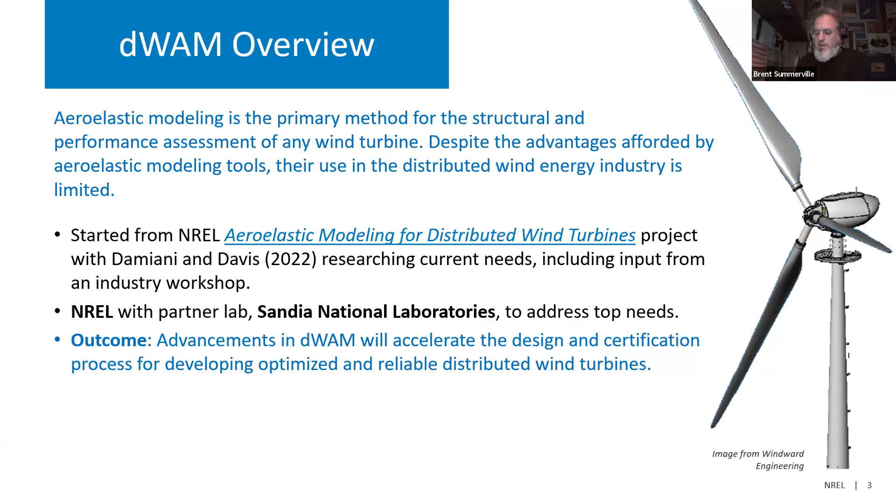So distributed wind is wind turbines of any size in a distributed on-site application, but we found out that the modeling tools such as OpenFAST were really well suited for large turbine archetypes, 3-blade, upwind, pitch regulated, but some of the distributed wind archetypes in the small and medium scale were kind of left behind, and some of the capabilities had disappeared as OpenFAST and other tools have evolved.

So the top archetypes that we looked at in distributed wind were upwind stall controlled with active yaw, upwind stall controlled with passive yaw with or without a tail, and then downwind stall controlled passive yaw, and then VAWTs, looking at the Darrieus and the straight blade H-VAWT archetypes. So we focused on those dominant archetypes and looked at the tools to see what was needed to model

these turbines. So the tools needed improvement, improved physics for these archetypes, including passive yaw and tail vane control, and of course VAWTs have had modeling needs for quite a while. So it's really great to have some support to turn the team of modeling experts' attention toward these distributed wind archetypes for a period of time here to sort of do a little catch up on the tools.

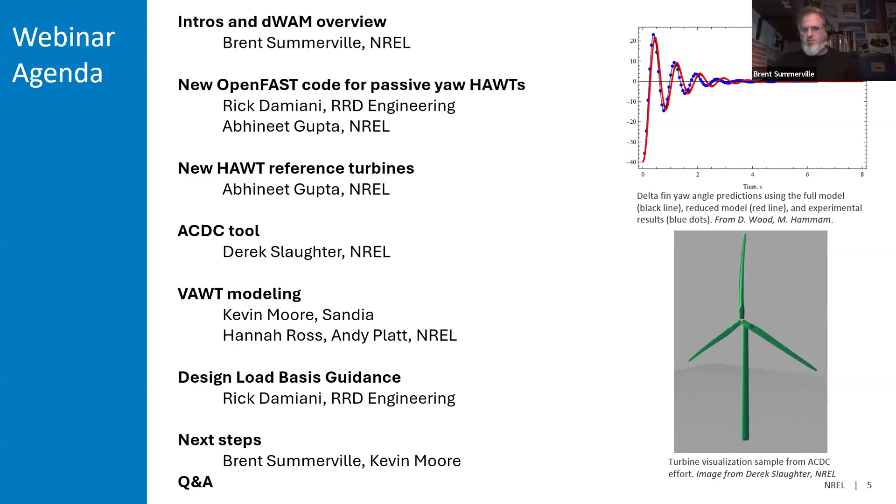Can you guys see the screen? Yeah, it looks good, Rick. Okay, great.

So I just want to remind folks that this work was also authored by Kevin Fletcher, who is a graduate student at the University of Virginia, and he is finishing up his PhD and will probably join us again at the Floating Wind Technology Company, which is this company that we have with Dean and Max and a few other junior engineers that work on a number of different things, including distributed wind.

Just a few words about the motivation of this study on the yaw friction. This is the table of contents of the presentation. We'll go pretty quick through it. We'll talk about the motivation. I will give a summary of the theory, and then maybe some snapshots of canonical cases for verification, including a case for a downwind turbine, and some conclusions, potential work to come.

I guess I probably should start the video so you can see me as well.

So the motivation, just like Brent summarized earlier, we carried out a study in the years 2021 and 2022 that was looking at aeroelastic modeling needs for distributed-scale wind turbines, and the yaw friction modeling was part of the top 10. In fact, it was in the top 5, as you can see here. This is the result of an investigation that we carried out across numerous stakeholders, and that report goes into more details about that.

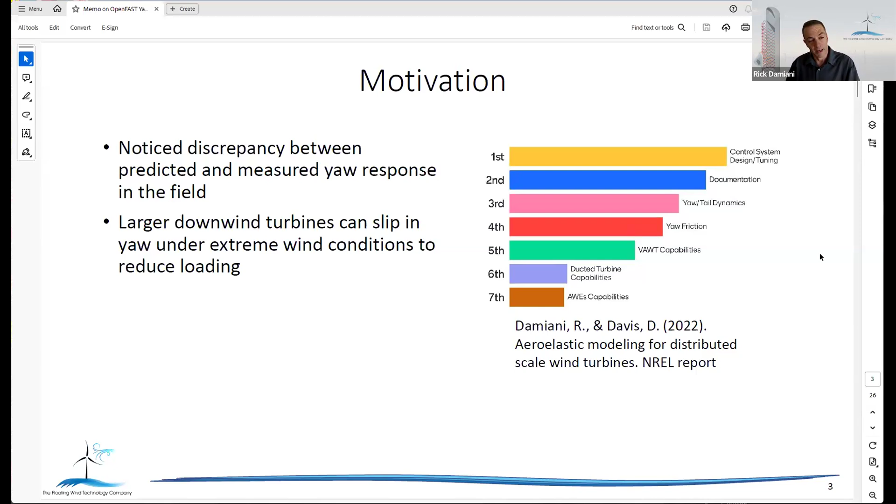Also, while I was at NREL and I was designing a rotor for Hitachi, which is a downwind turbine, at the time we were looking at a 10 megawatt rotor. And one of the features that this turbine had was the capability of slipping in yaw under extreme wind conditions. It was a feature, but in other machines, obviously, that can happen unplanned. So having a good model for yaw friction could be certainly useful to understand the dynamics and the loads on different kinds of machines, not just distributed wind turbines.

So just a few words about the theory. We implemented a basic Coulomb friction and an expansion of that theory for the inclusion of viscous friction. So in the Coulomb friction, as you may very well know, we usually refer to static and dynamic friction, and the Coulomb theory assumes 2 different values for the friction coefficients, and therefore we have different thresholds to use in case the joint is actually static or is moving, so it's in a dynamic situation.

And the viscous friction adds a dependency on the speed. It can be linear, but it can also be more complicated. So quadratic, for example, to simulate more complicated joints, not just sliding surfaces, but potentially also roller bearings. So what you see here are just the equations. I'm not going to go into these details, but this is just to give you an idea of what went into the code in OpenFAST.

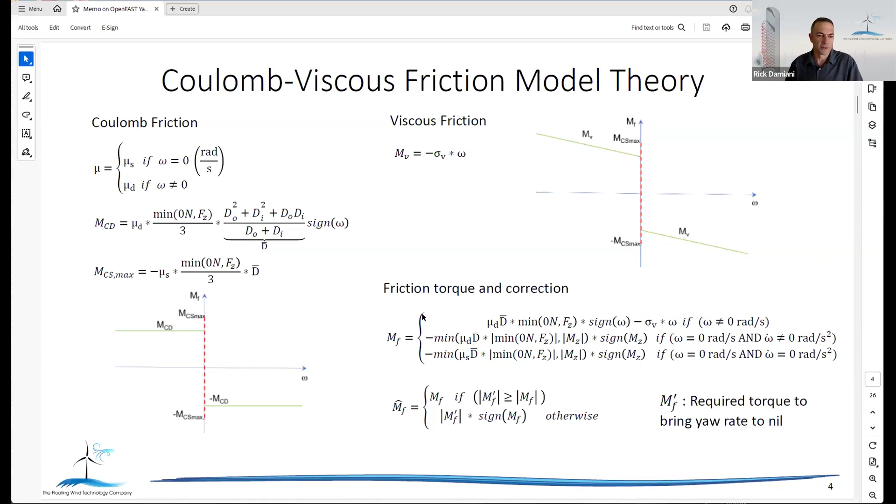We changed the ElastoDyn module of OpenFAST to include this model for yaw friction, and we also changed the input file to ElastoDyn to account for the various modalities that we can use for the modeling of yaw friction. And so you can see here the main parameters that can be introduced into the code.

The first one is a flag that allows the user to select whether or not the yaw friction is enabled and whether or not you want to use your own parameters in terms of maximum Coulomb friction torque, for example, and dynamic friction moment at null yaw rate, or if you want the code to estimate what those values should be given a certain static and dynamic coefficient. So in that case, the code would also account for the effect of the normal or axial loading on the RNA. And then, of course, there's a viscous friction coefficient that you can also use.

I just want to highlight that by changing that initial flag, again, you can select which model or submodel you're going to use, and you can also augment the entire yaw friction modeling with your own user-defined model.

Like I said, a few snapshots about the canonical cases. We started with a very simple case. We looked at an AOC wind turbine, which is a free-yawing downwind turbine, for which we have an aeroelastic model available. And it's an older machine. It's not used anymore, but it's a 50 kilowatt machine that has, again, an aeroelastic model publicly available. You can see that it has a 15-meter rotor diameter, and generally speaking, it was mounted on a hub height of 25 meters.

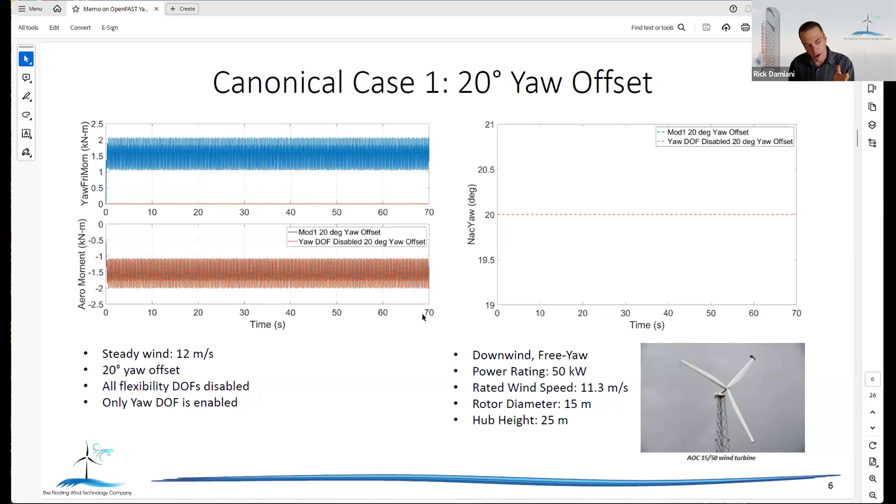So we did that by first disabling actually the yaw degree of freedom, calculating the aerodynamic torque on the RNA, and then allowing the yaw degree of freedom free, such that we could then verify that indeed the yaw friction was exactly opposite to the forcing.

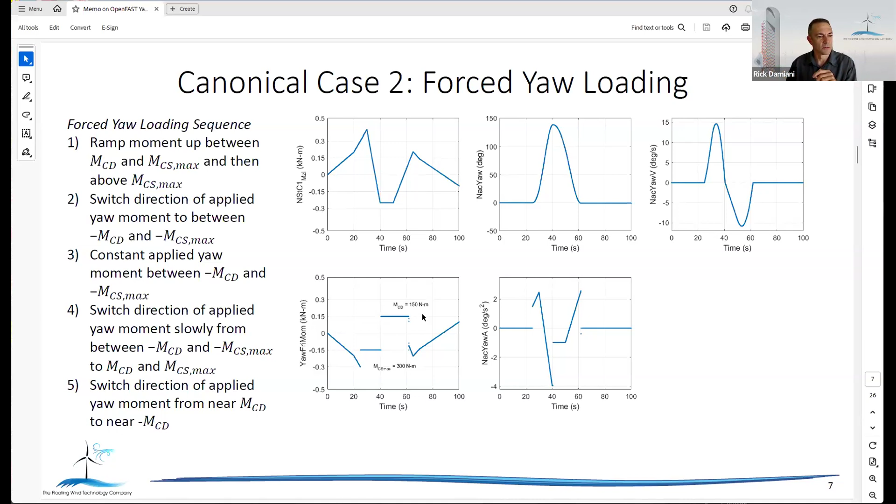Then we went a little bit more into more complicated cases. In this particular case, as illustrated here, we just drove the torque on the RNA to tower joint, so at the yaw bearing, with a prescribed law, and that allowed us also to verify that certain behavior was happening when we would cross those thresholds, again, of static and dynamic friction in particular. And everything turned out to be what we expected after a few iterations and a few bugs that we had to fix.

Here's another case where we had a simple decay. We introduced a yaw spring in the machine, and we preloaded it with a certain yaw angle, and then we would expect the yaw to go back to zero or close to zero, depending on how much friction we input. And we verified that with the chosen, again, friction parameters, we would get as a steady state value for the yaw exactly what we would expect for the balance of that torque spring that we introduced.

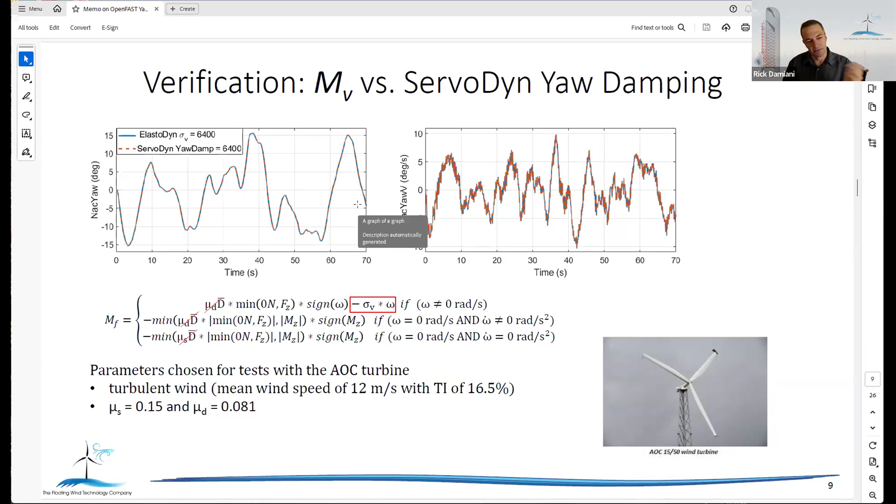And then we also looked at the verification against ServoDyn, where yaw damping can be inserted somewhat separately from this module. Obviously, this module can take care of linear damping, as I described before. So we wanted to verify that indeed using ServoDyn and the yaw damping in there, or our yaw module in ElastoDyn would return the same response. And you can see basically these curves here showing the yaw as a function of time, that for these, the curves are basically coincident.

So concluding, we implemented a yaw friction that can obviously be further expanded. It's already versatile enough where you can introduce your own formulas if you have, say, formulas from a ball bearing or roller bearing manufacturer. You can try and introduce those laws in there if they are at least describable with equations that are similar to what we already have, or you can introduce your own module within the user-defined function. So this preliminary verification has been completed. We obviously would like to do some more validation against some field data.

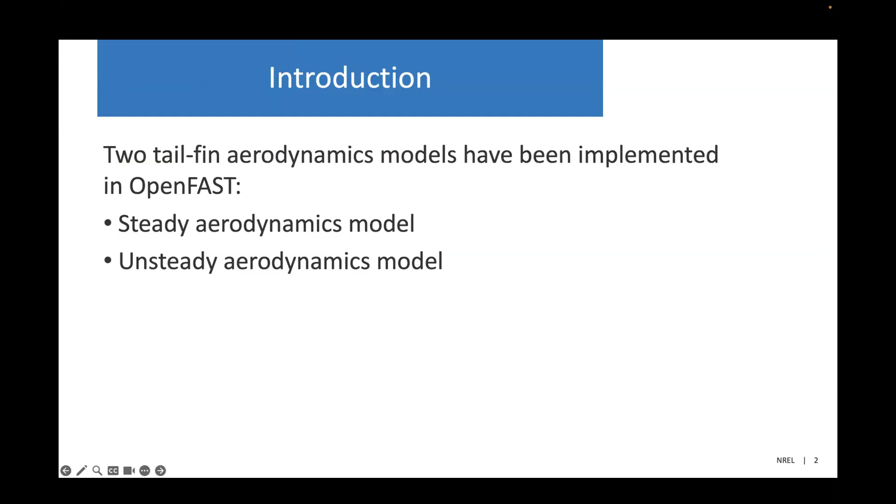The first one is a steady aerodynamics model, and the second is an unsteady aerodynamics model. The steady model is from the legacy FAST v7, but it was not available in OpenFAST, and distributed wind turbines needed a tail fin model. The steady model is very helpful in rapid prototyping, design and analysis, and stuff like that.

Now, the steady tail fin model is a simple polar-based tail fin model. It utilizes the airfoil polars lookup table, and it provides users the capability to implement the tail fin as a simple airfoil. Users can provide the lift, drag, and moment coefficients, and OpenFAST can calculate the tail fin forces and moments and the entire effect of tail fin aerodynamics on yaw.

This simple model can be implemented as a separate tail fin aerodynamics input file. In this implementation, you can select between no tail fin model, a polar-based model, which is what I'm talking about right now, and the unsteady model, which is the next half of this presentation. Then the user needs to define the tail fin chord, the area, and the undeflected position of the tail fin, basically the arm length in X, Y, and Z direction.

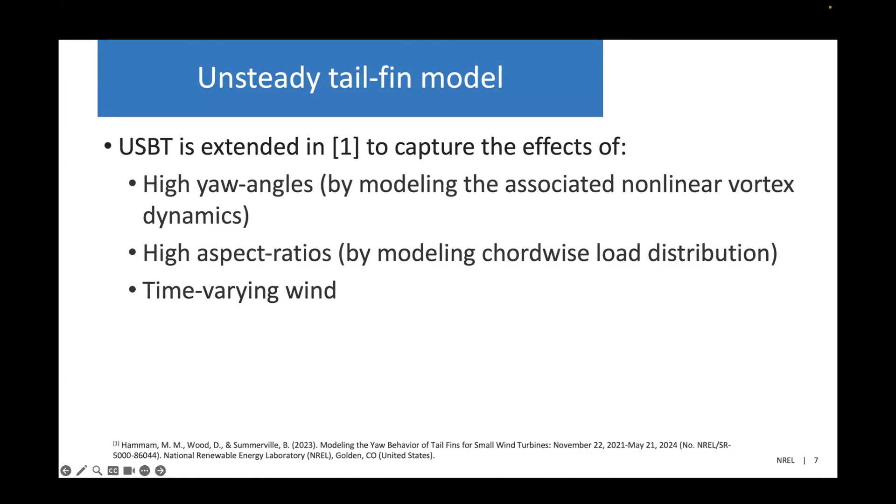So the first term, KP, captures the effect of potential flow on the tail fin. The second term, which includes KV, captures the effect of vortices, so the effect of vortices on the tail fin force. And the last term captures the effect of the drag. So all of these terms are taken into account.

And as you can see, all of these are multiplied by something called a separation function, x1, x2, and x3. These three functions sort of tell OpenFast the relative contribution from the three terms. So x1, x2, and x3 act like weights for the potential flow source of the tail fin force, the vortex source of the tail fin force, and the drag source of the tail fin force.

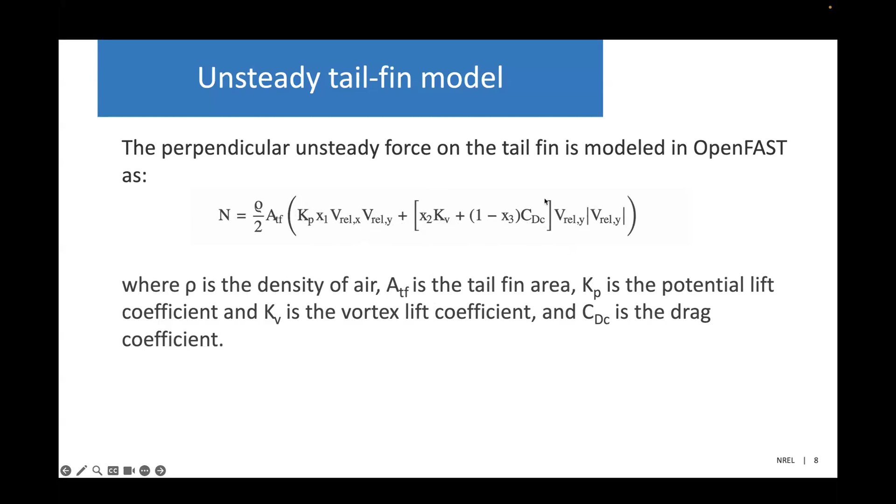Now, these separation functions are usually a time-varying phenomena, but Hammam and Wood conducted some studies and found out that a quasi-steady approximation of the separation function is also quite good. So in OpenFast, a quasi-steady approximation of the separation functions is implemented. And I'll just go into a little bit of detail of how these separation functions act.

So this parameter alpha star tells us the value of the angle of attack above or below which the potential flow or the vortex flow or drag coefficients become important or not. So that's one parameter that we need to find out. And the other one is sigma, and sigma characterizes the slope of this function.

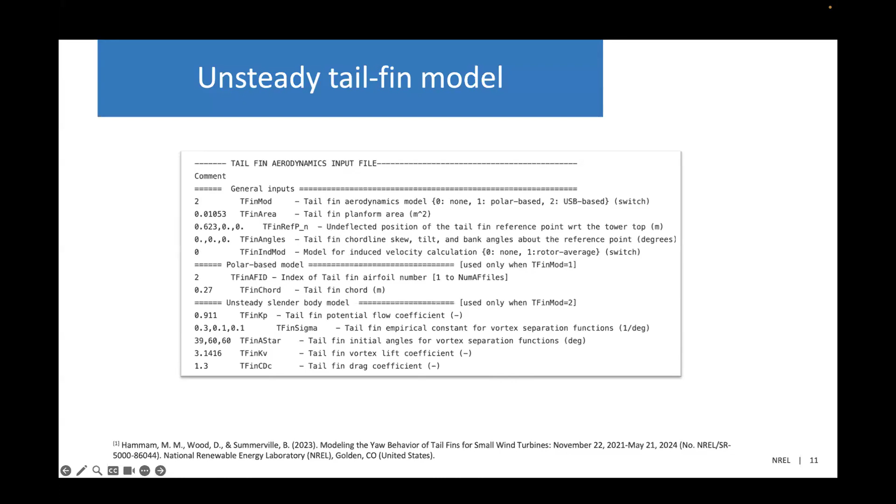And the rest of the data is pretty simple: the tail fin area, the tail fin positions and angles, and stuff like that. This model has been implemented and tested experimentally as well, and that's a separate publication that we have. All the credit for developing this theory goes to Hammam and Wood. And we have this implementation that has been tested. So I think this is very useful if the user needs to implement something that is higher fidelity compared to a simple polar based approach. Yep, that's it.

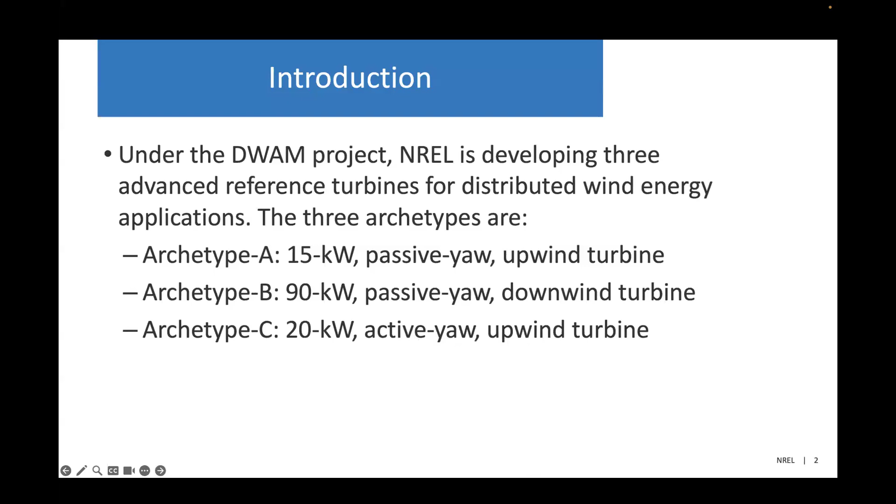So the three archetypes that are being developed under DWAM are a 15 kilowatt passive yaw upwind turbine, a 90 kilowatt passive yaw downwind turbine, and a 20 kilowatt active yaw upwind turbine. And these three turbines are based on existing industry standard turbines. So archetype A, the passive yaw upwind turbine, is based on the Bergey Excel-15 wind turbine, while the passive yaw downwind turbine is based on the Eocycle turbine, while the active yaw upwind turbine is based on the QED Phoenix 20 turbine.

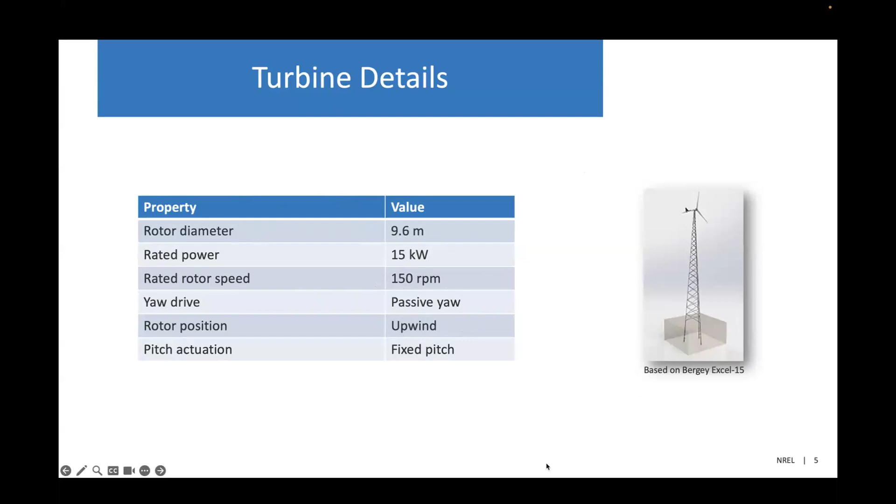So I'm going to first talk about the NREL 15 kilowatt turbine. There's a lot of information here, so I'm going to go a little bit faster to only talk about things that are of interest to this audience. This turbine has a 9.6 meter rotor diameter, a rated power of 15 kilowatt and a rated rotor speed of 150 RPM. As I said, this turbine is passive yaw and upwind. And all these turbines do not have a pitch actuator, so they are all fixed pitch turbines.

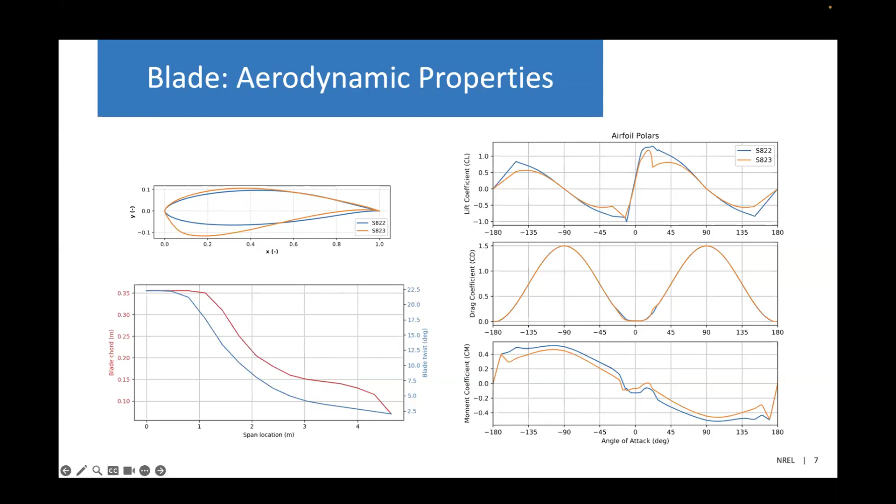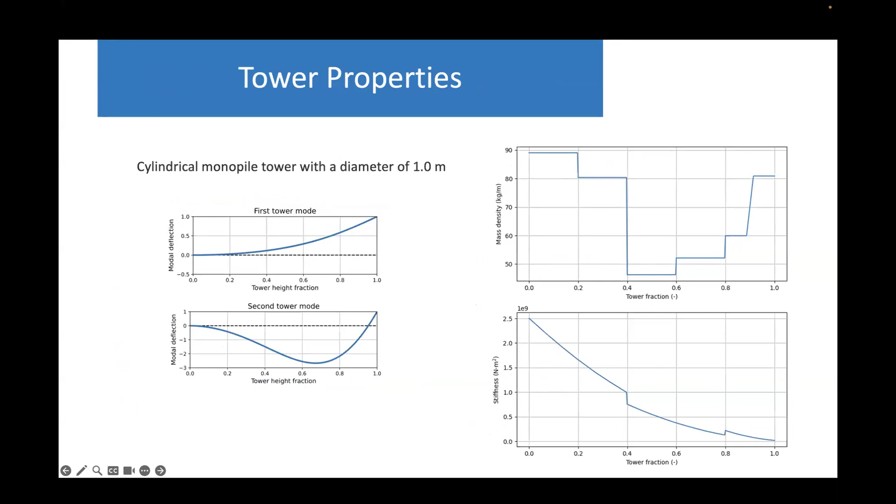Here are the properties of the hub and the nacelle. Again, this is a direct drive turbine, so it has a gearbox ratio of 1. And the other parameters are provided. Again, this is a full aeroelastic model, so it's similar to how the NREL 5 megawatt model was presented. The details of everything can be found using the OpenFAST files that are provided with this model.

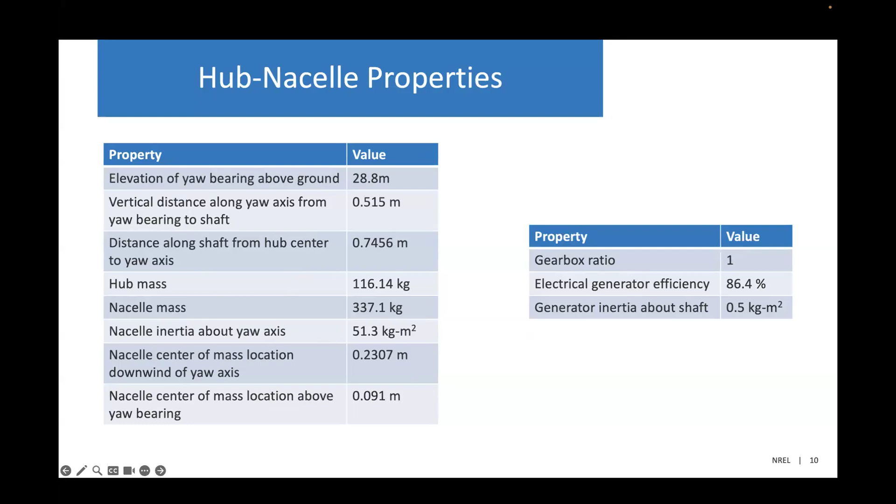And finally, the control system. A simple lookup table based torque controller is employed. Of course, we don't have a pitch actuator here, so no pitch controller, but the controller can be seen in this plot where, above a certain rotor speed, the torque increases to track the optimal tip speed ratio. And after around 150 RPM, which is the rated RPM of this turbine, the torque increases so that the RPM is tracked at the rated RPM of 150 RPM as the wind increases.

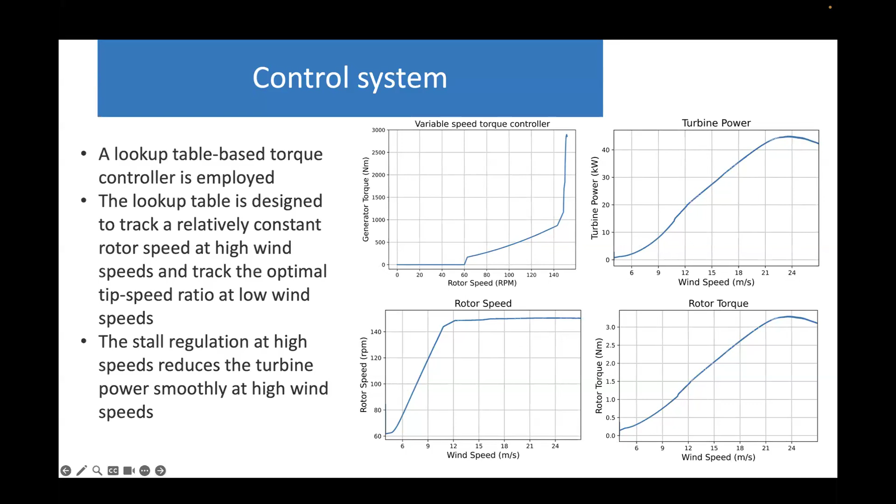And you can also see that this is a stall regulated turbine. So as the wind speed increases, after a certain wind speed the turbine power drops and the turbine stalls, and this is how the overspeed protection has been implemented. And this continues for a while. So that's the control system behind this model. It's a simple lookup table based controller, but I think it's quite effective in maintaining rotor speed and providing overspeed protection.

So this was the NREL 15 kilowatt model, which was based on the Bergey Excel 15. I'm also going to talk about the NREL 20 kilowatt model, which is based on the QED Phoenix 20 turbine. This is an active yaw turbine, so we have a yaw controller implemented in there. This is slightly larger with a rotor diameter of 12.3 meters and a lower RPM of 78 RPM.

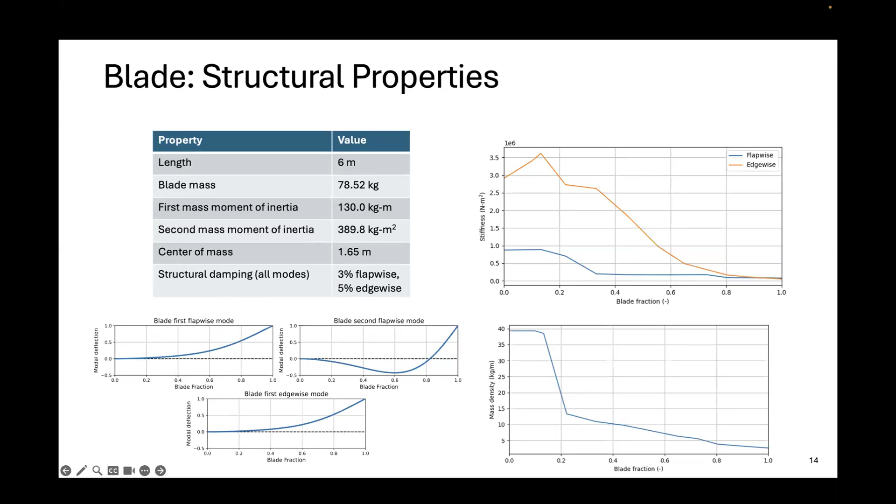Again, I have all the details of the structural properties of the blades. I think the important thing to note here is that the structural damping for all the modes was slightly higher with this model. So 3% for both the flapwise modes and 5% for the edgewise mode, which is slightly higher, but that's the value that corresponds to the QED model, so that's what we are using.

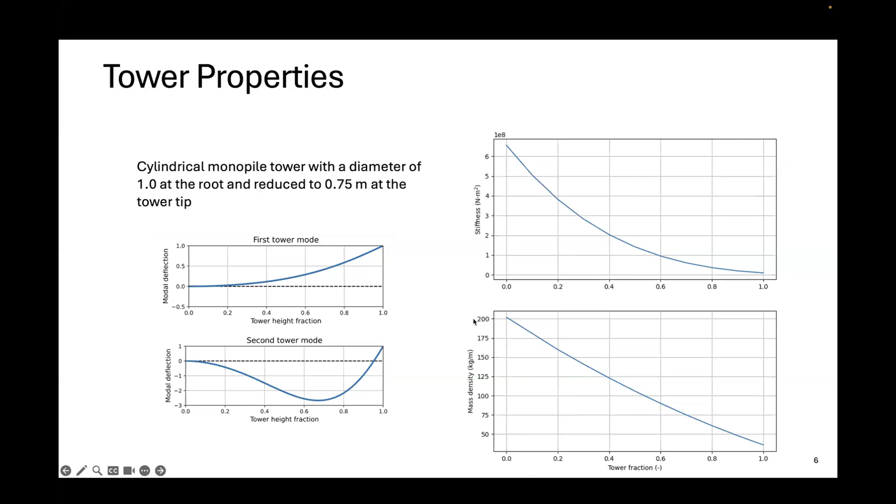And the tower is a cylindrical monopile. It is a tapered tower, so it has a diameter of 1 meter at the root and reduces to 0.75 meter at the tip. And I forget the tower height, I should have had it here, but I think that's included in the model. We have mass density and stiffnesses. And again, we have hub and nacelle properties.

This is again a direct drive turbine with a gearbox ratio of 1. This has quite a heavy nacelle compared to the previous turbine. So this is quite a bit different from the previous turbine. This is slightly larger and again, active yaw. So of course, all this weight gets included in the nacelle weight.

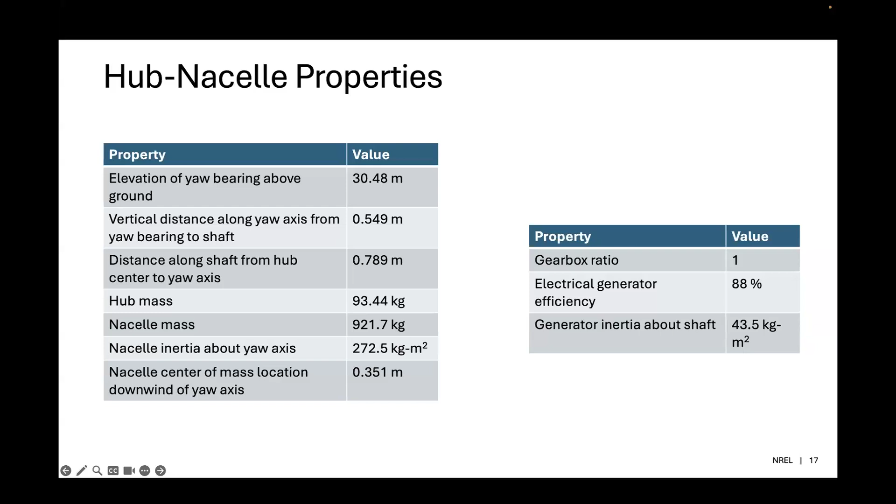And the controller is a lookup table based torque controller, but this is implemented using the ROSCO toolbox. In this turbine, the shutdown is taken care of by ROSCO. And we have a lookup table based generator torque, which is similar to the previous model, where the torque increases to track the tip-speed ratio, and above that, it tries to keep a constant rotor speed. Of course, it increases slightly, but if the wind speed increases further, then the turbine shuts down, and that is how the controller has been implemented for this turbine.

And both of these turbines have been made available publicly on NREL's GitHub page. So we have the NREL 15 and 20 kilowatt. We are working on the NREL 90 kilowatt, and that's going to be up there soon. We have these two models available on the NREL GitHub publicly, and the third one will be available quite soon. So this will cover a wide range of certain types that distributed wind turbines have, and this should provide good references for further research.

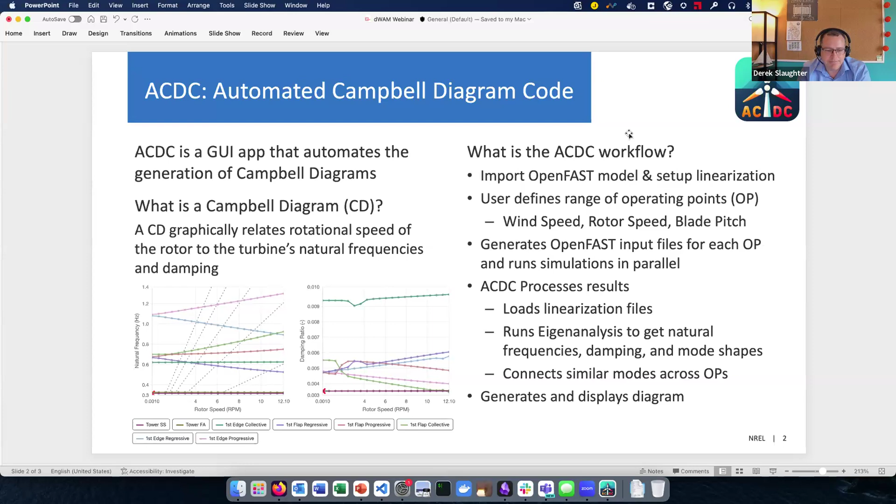So ACDC is an automation tool that you can use to import an OpenFAST model, create a bunch of settings to perform linearization. The user gets to define the range of operating points, wind speeds, rotor speed, blade pitch. It then generates OpenFAST input files and runs all of the simulations in parallel, and post-processes the results, loading the linearization files, running the eigenanalysis, and then does a modal identification to connect similar modes across all of the operating points, and finally generates and displays the diagram.

What are the advantages of ACDC? The existing methodology involved a whole lot of Python scripts and manually setting things up in OpenFAST. And this one provides a nice graphical user interface for performing the same analysis. It has a few new methods for connecting the modes and doing the mode identification. Also, the diagram is interactive. You can use it to click on and explore the operating points and the associated modes. And finally, it has a nice capability of doing 3D visualization of the modes as seen over here.

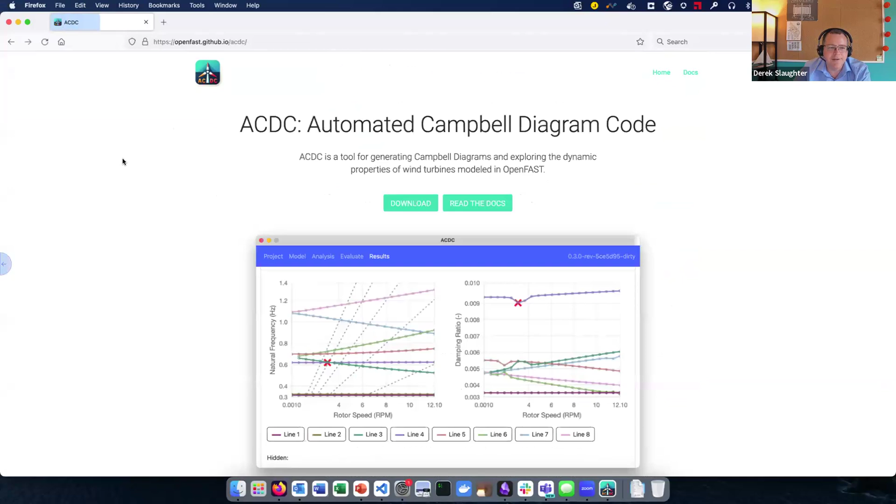How do you get it? It's available on GitHub. There's several releases, I recommend using the latest one, and there is some fairly complete documentation available on the GitHub pages, which looks like this. So you can download it here, which will take you to the releases, or read the documentation, all the various sections. And the download is like this. Expand assets. Binaries are provided for Linux, macOS, and Windows. Download those, they should just run. If they don't, please file an issue. We're happy to make improvements. If you have any suggestions, feel free to document them here.

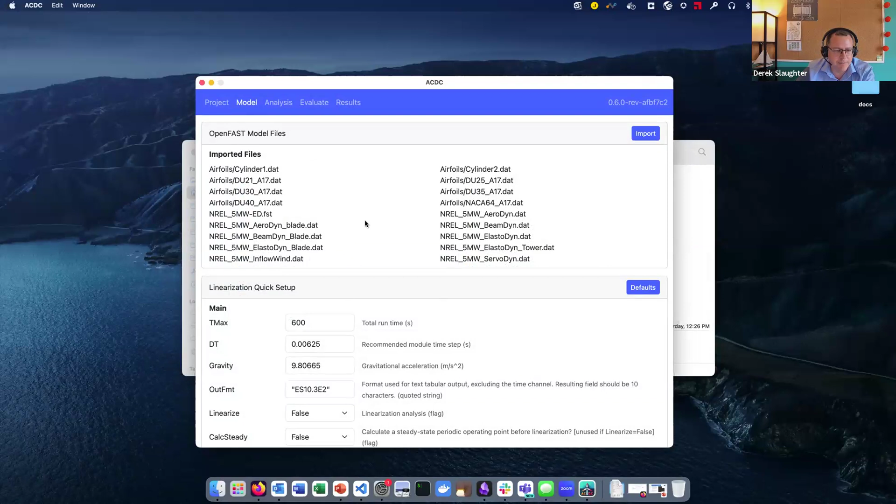But the essential process is you can create a new project file, import the OpenFAST models, which looks like this. You go and you find the .fst file, the main OpenFAST model, and it will import all of the associated files from there. Here's the list of files. If it doesn't import all of them, check your file paths, but it should grab everything that's relevant. Then you come down here and do linearization quick setup. There's a handy dandy defaults button that will change a lot of the basic settings so that you can just move forward with doing the analysis.

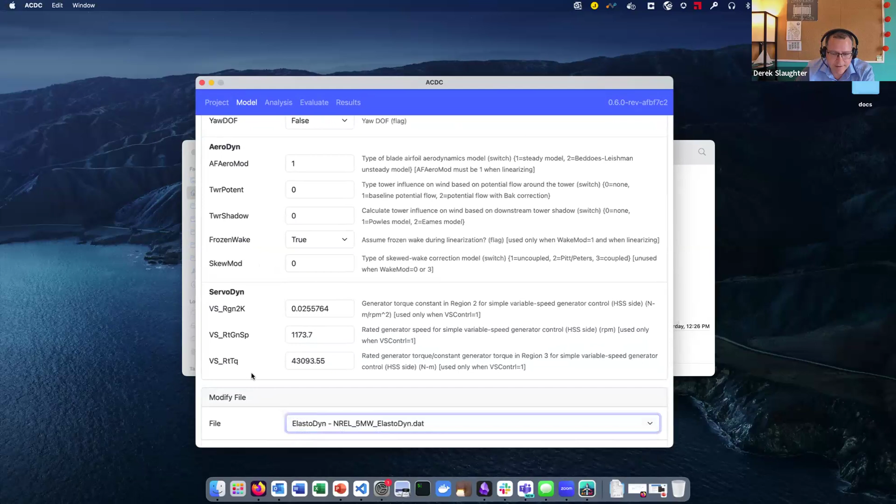But we're setting things like the output format to have a sufficient number of decimal places, turning linearization on, calculate steady on, trim tolerance, some damping. Want to do 36 linears. We want to linearize at 36 points through a revolution of the rotor after it reaches steady state. And then there's just some basic settings that the user may want to tweak while they perform the analysis that are kind of easy to get to. You can also come down here and edit a whole lot of the settings in the files, the ones that are probably relevant to linearization, turning things off and so on.

Next up is to set up the analysis. I've got a couple in here, one for structural only and one for structure plus aerodynamics. For the structural only, you specify the min and max RPM and the number of operating points, and then provide a curve of rotor speed versus blade pitch. This is pretty simple for the 5 megawatt reference turbine. Just doing a straight line essentially.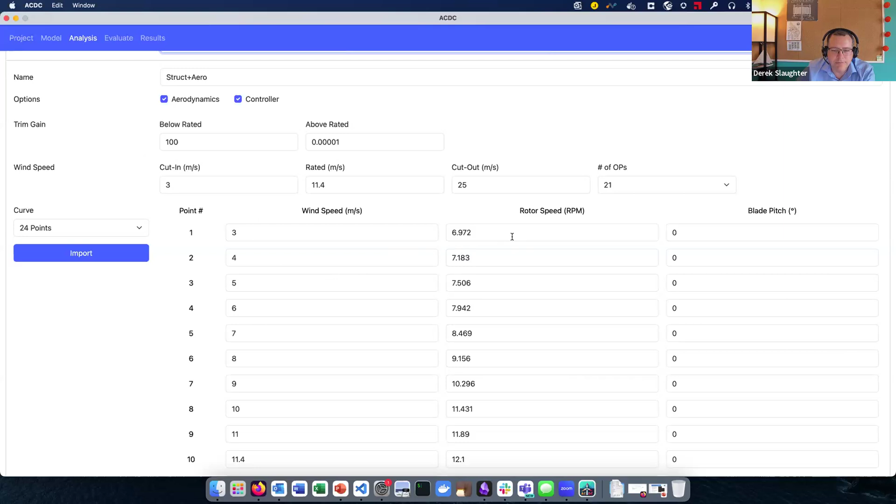For the structural plus aero, you need to have wind speed, rotor speed, and blade pitch, and define the cut in, rated, and cut out wind speeds. These boxes up here, below rated and above rated, have to do with using the controller to tune model parameters in order to make the model match the target rotor speed at the given wind speed.

And you can see here, this is kind of what the curve looks like. The X's are the points input here, and then it performs a spline fit of those and interpolates to get the actual operating points so that you don't have to do manual interpolation. If you're not a big fan of typing these in one by one, because nobody is, you can import this table from a CSV file, and there's instructions in the documentation on how to format that. All right.

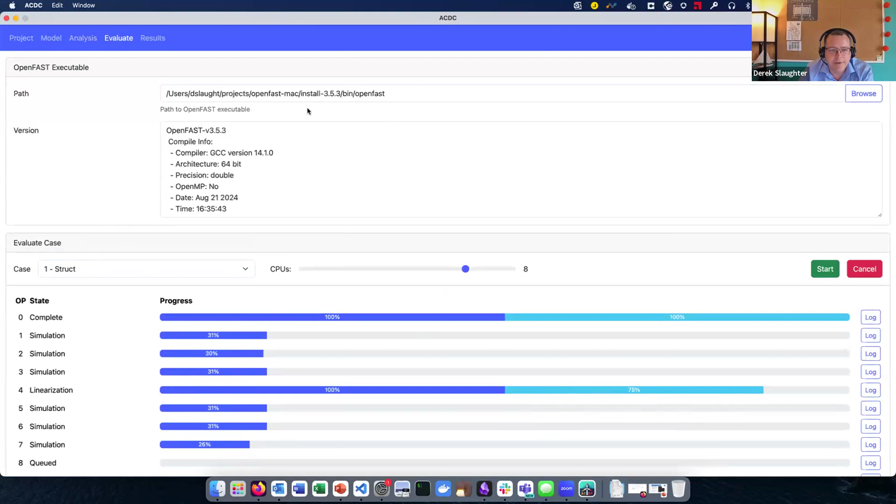Next part, I'm going to go ahead and start this, and then I'll talk through it because it takes a moment to run. You tell ACDC where your OpenFAST executable is located. You can get OpenFAST from either a Conda installation, compiling it yourself, or if you're on Windows, downloading it from the OpenFAST releases. But this is pretty straightforward. You just browse for it on your local machine, and it will do a quick run and give you the information associated with it, so you know what you're running.

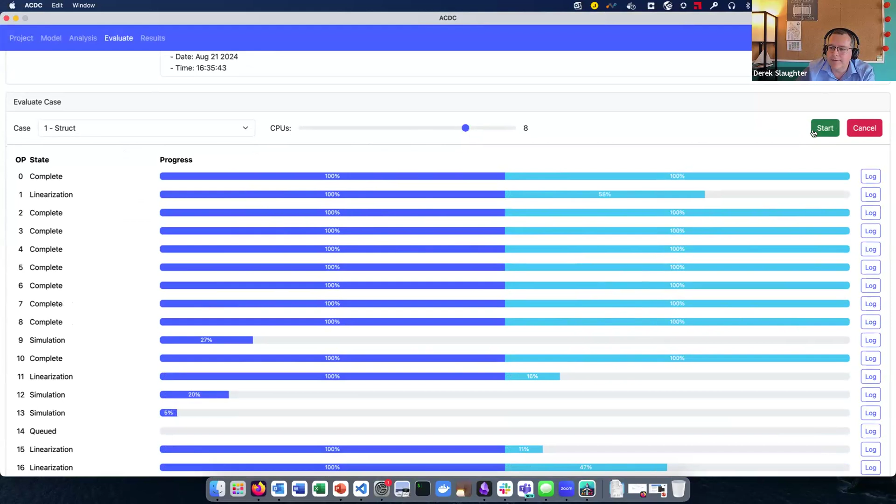What I did down here was I selected the case that I wanted to run, whether structural or structural plus aero, the number of CPUs to use in parallel, and then hit start. And as you can see down here, it's running through the simulation part and then through the linearization part. So once it starts doing the linearization, the simulation jumps to 100%.

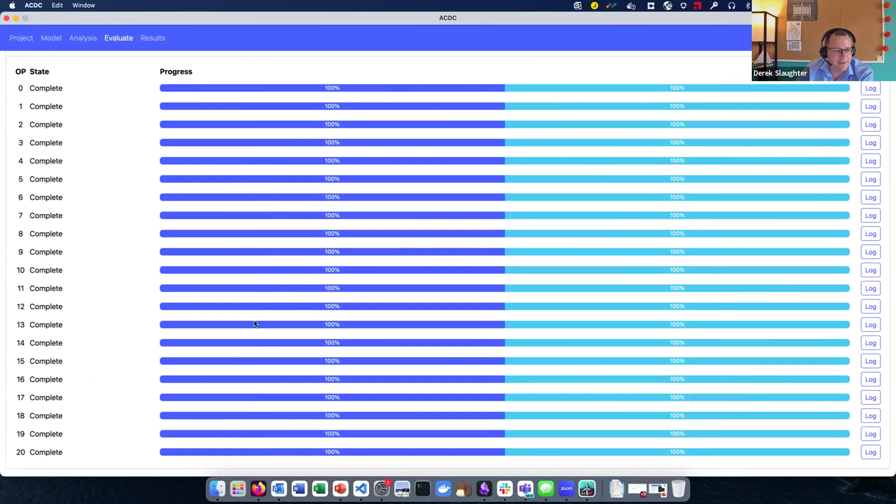If something goes wrong, it will cancel all of the evaluations and say error right here. In which case you can click on the log button and it will show you the log output from running OpenFAST. So you can use that to debug things and go back to the model and tweak parameters and come back and run until everything runs successfully. So you get this nice string of completes and everything's at 100%.

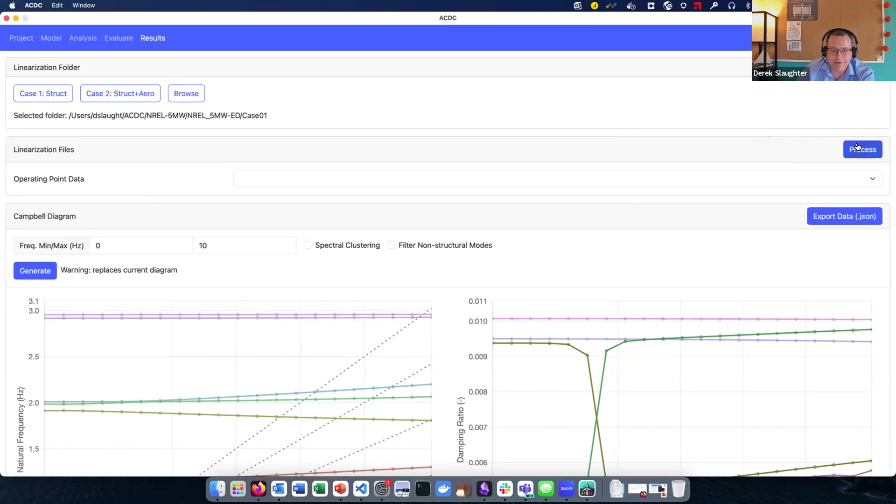Then we can jump to results, go over here to the current case. I had already run this, so it had a bit more information here already, but the normal process is to click process on the linearization files. And then you can look through and see what the data at each operating point was. For this particular model, operating point 3, we found 14 modes, these natural frequencies, damping ratios, and so on.

And then the next step is to click generate on the Campbell diagrams. And so this will give you the natural frequency versus rotor speed and the damping ratio versus rotor speed in RPM. Since this is a structural only case, everything is versus rotor RPM.

And so if I select a particular point off of the diagram, I can come down here and there's a line label and a color, and the information about that mode. So what is the natural frequency and damped frequency and so on. So you can click around through here and explore what's going on in the model. But the most exciting part is to be able to visualize the mode shape.

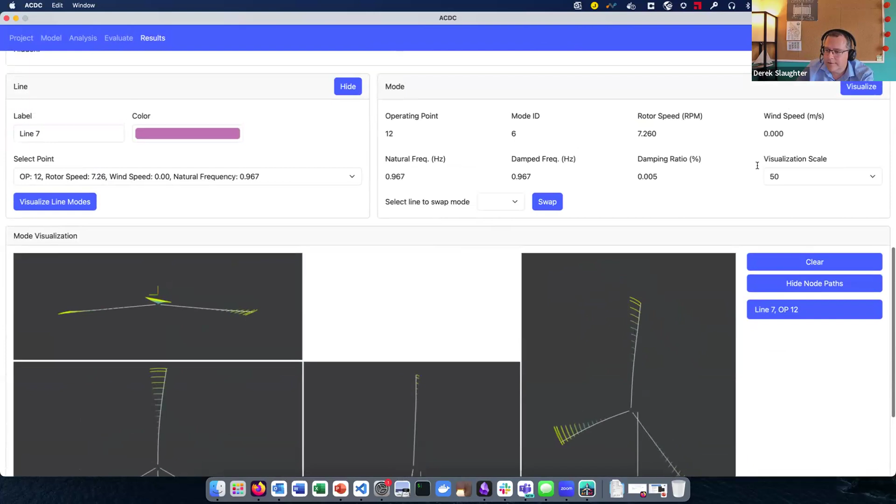Set the visualization scale here and click visualize and scroll down and it will show you the shape of that mode. Let me set that scale just a little bit higher. So you can see the blades and the tower. Tower's not really moving, but the blades are wiggling back and forth. And that looks like a blade edgewise regressive mode, just based on the motion of it.

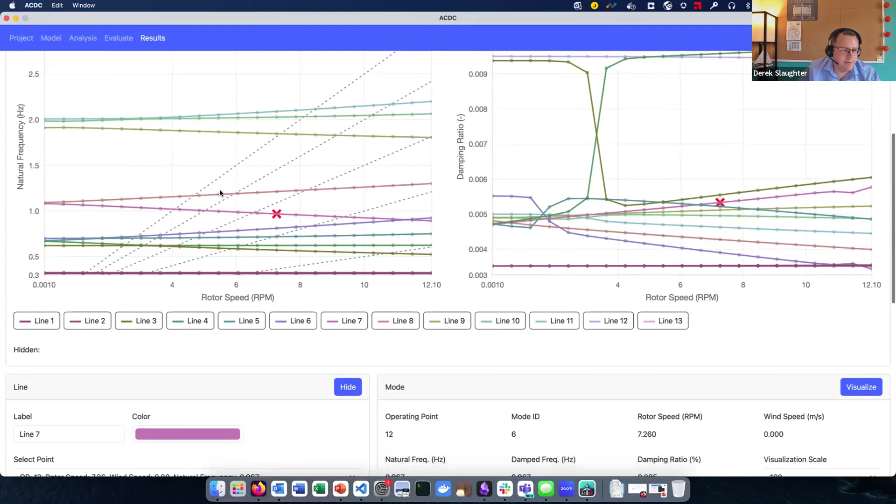You can then turn on the node paths, and that shows you the nodes on the blade, the path that they're taking throughout that mode oscillation. And so once you've kind of figured out what that mode is, you can come down here and say edgewise regressive, and it will include that information in the legend for the plot.

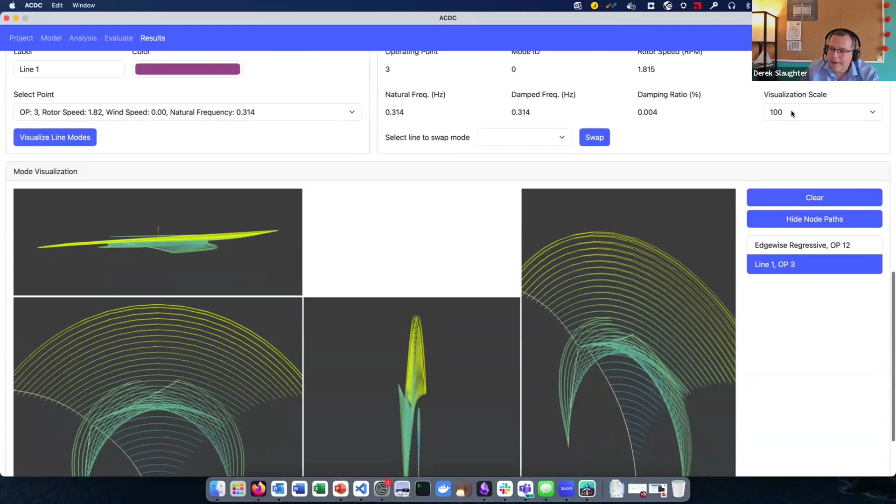You can also just click on line here and it will take you to the first point. Come down here and select any of the other points in that line and also do visualize. And you kind of have to play with the scale a little bit because the lower frequency ones don't need quite as much scaling, but here you can see a tower side to side mode and all the associated node motions.

Something else that's kind of nice with this tool is you can fix errors in the mode identification. What we have here, let's see, visualize.

So that looks like a collective edgewise mode. And if we look at the next point down here and visualize it, that looks more like a flapwise mode.

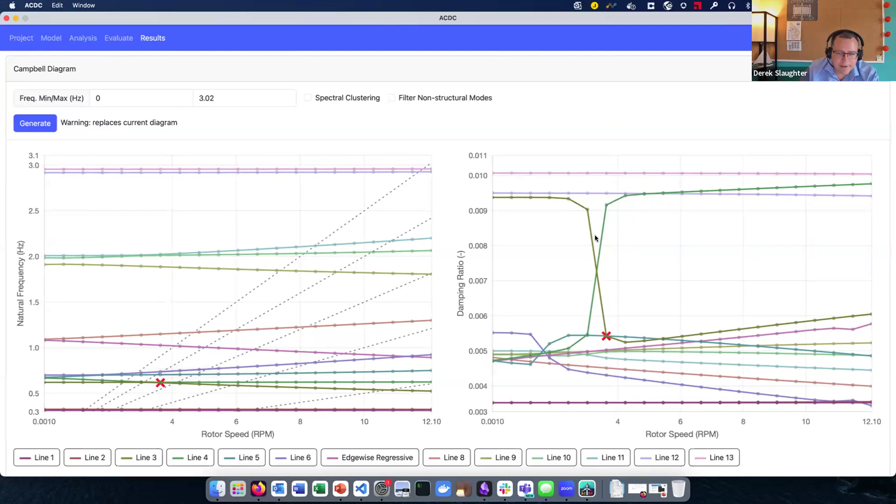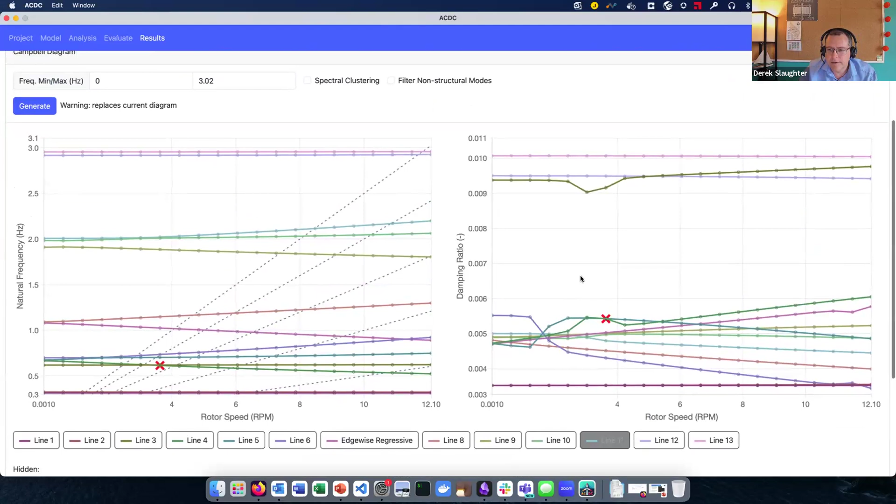And what's actually happened is that it has misidentified the mode as it went from this line to this line. And you can click that and then click the line that you want to swap that point with, which I believe was line 4. Swap. And you can use that to clean up your Campbell diagram so that you get the same mode all the way through all the lines.

Another way to do that is this experimental feature called spectral clustering, which will try to automatically clean this up using a method called spectral clustering. And there's information about that in the documentation. It works some of the time, but it also has the potential to mess up other identified lines, as you can see happened here.

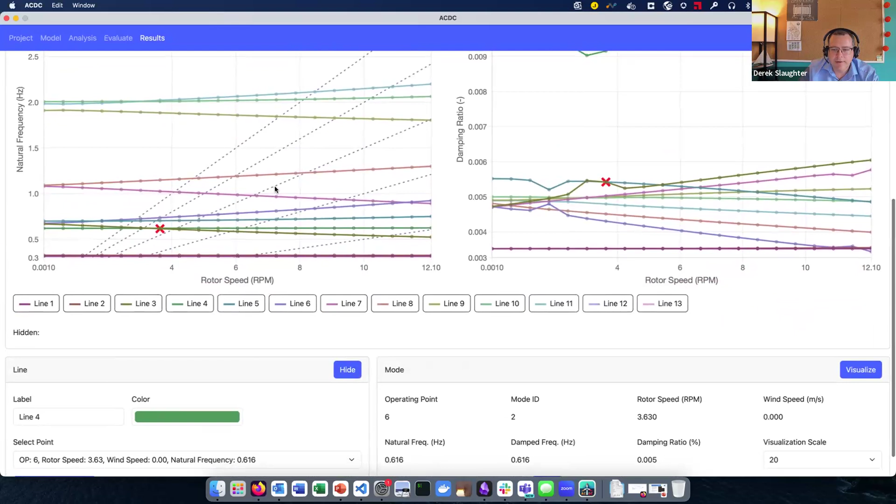But yeah, so that is how to use the AC/DC tool to get a Campbell diagram and then visualize the mode shapes. Right, any questions?

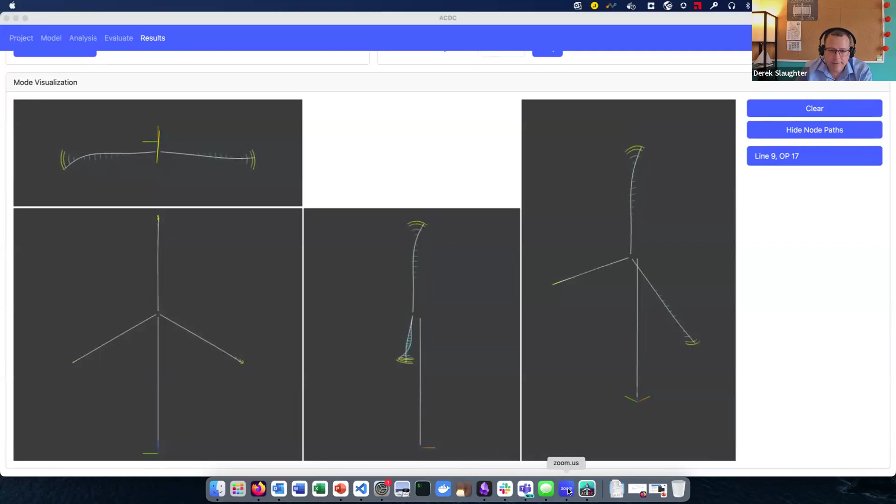Awesome. Thank you, Derek. Well, that's fun to watch. Any questions on AC/DC before we move to VAWT modeling? Awesome. Well, thanks again, Derek. That's a lot of work in there, and a very cool output, and hopefully it's very beneficial or useful to folks trying to do their modeling and generate Campbell diagrams.

So thanks again. Okay, so next we'll go into VAWT modeling, vertical axis wind turbines, led by Kevin Moore at Sandia, and then on the NREL side, Hannah and Andy worked with Kevin on this. So take it away. Thank you. All right, yeah, thank you for that, Brent.

So on the VAWT modeling side, we're right in line with the overall dWAM goals for improving the models, helping with these reference turbines and doing the validation, improving the user experience, and realizing these impacts. And so the motivation is that for the vertical axis wind turbine community, despite the historical failures from the 80s and 90s, there continues to be both industry investment and companies pursuing new and innovative designs.

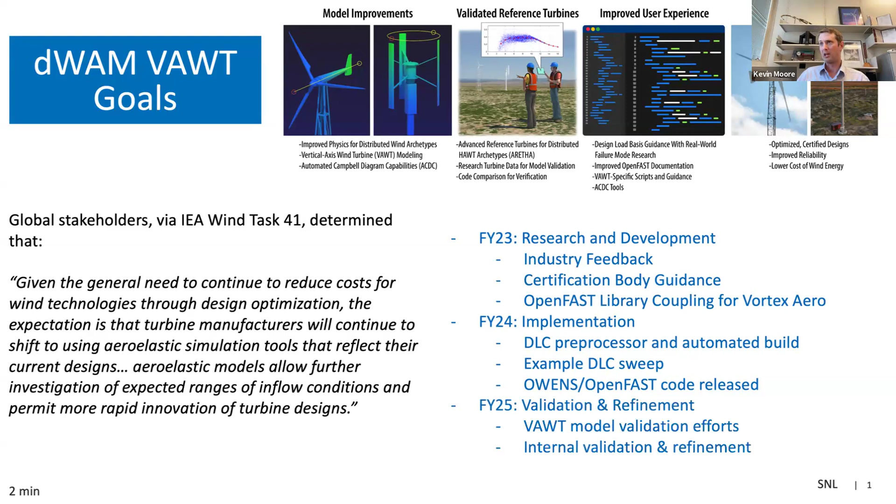So when we're running OWENS, there's 2 aspects. There's the OWENS side, where we can run simplified aerodynamics and structures, and then there's also the OpenFAST coupling that adds features. And I'm going to talk specifically about the OWENS features and improvements that have been done so far. And so, again, the code is out in open source. It's been at Sandia for upwards of a decade, and we finally were able to get it open source. So a major thing that we're able to do for the industry.

And then we did significant improvements for the robustness and the developer architecture, so that there's automatically deployed documentation and example cases, doc strings, testing scripts, and there's that automated pre-processing and post-processing so that we can get what we need for the design load case sweeps, and it minimizes the amount of manual post-processing work that you have to do.

Additionally, we've added other modeling options and the ability to do advanced visualization, and added example cases and standardization of a lot of the internal building blocks that were being used, as well as enabling a precompiled binary process that we hope will be able to simplify installation in the future. And so that's a summary of work that's been done for dWAM on the OWENS side. And so now I'm going to pass it over to Andy Platt for the work on the OpenFAST coupling.

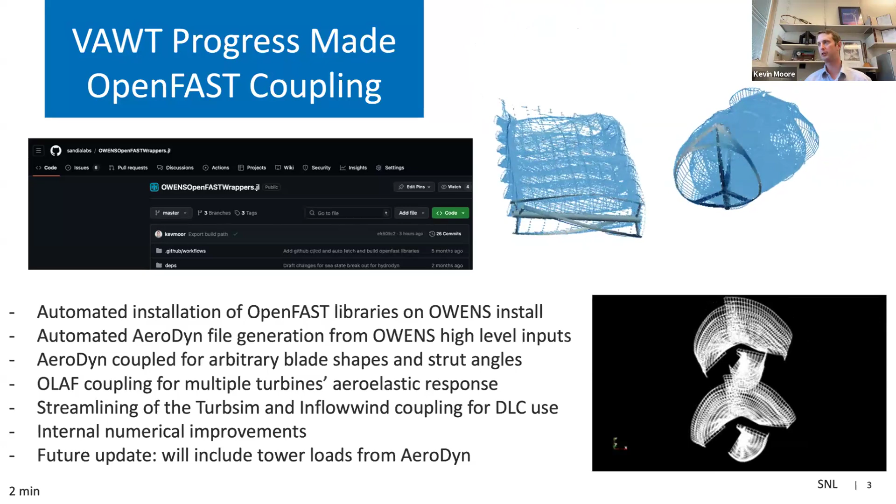So a lot of work going on here, and a lot of continued work in the future for this. It's exciting to be able to leverage and synergize in these areas. So now I'm going to go through a demonstration. It's a pre-recorded video, and it's accelerated, in order to fit into the short amount of time that we have. I didn't want to have you wait through the installation processes.

We're going to go through why we chose the Julia language, and an installation and run of Julia and OWENS. We're going to install and set up Visual Studio, run a design load case example, install ParaView and visualize that, run the automatic Campbell diagram analysis and visualize the modes, give a brief overview of the documentation, a showcase of some of the complex things that we can do, and then a brief touch on the current status of the validation. So let me hop over to the video.

So, why choose the Julia programming language? I'm going to start off with the simulation in the background and note that, first off, it has all the benefits of an interpreted language, which ultimately results in fewer lines to maintain and is easier and faster to develop. Second, it has all the benefits of a compiled language, so it can run as fast as C or Fortran, and it can be pre-compiled. There are also a lot of existing libraries in Julia for the structures, the aerodynamics, and a lot of the in-between components that are very useful for our use cases.

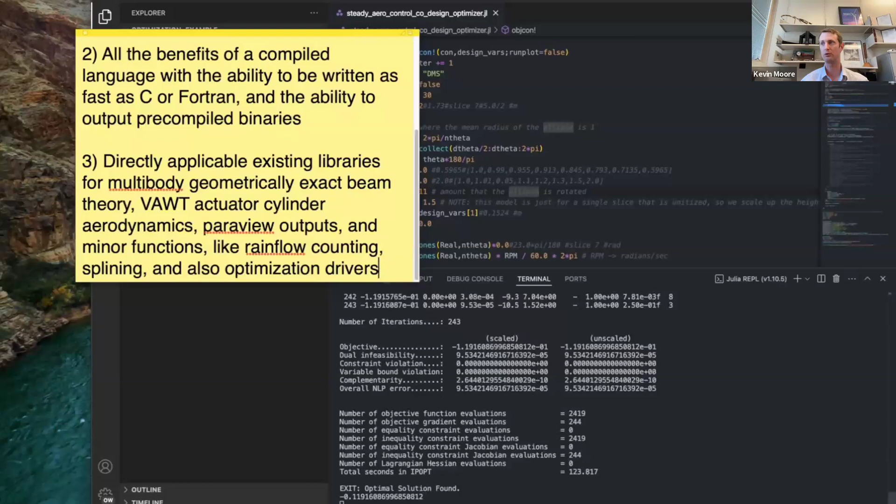One of the important things that's interesting to me is the automatic differentiation. We can do large-scale design optimization using the analytic gradients, like what was done in the background, where we ran a control co-design of a small VAWT, aerodynamics only, with the optimal chord and pitch control.

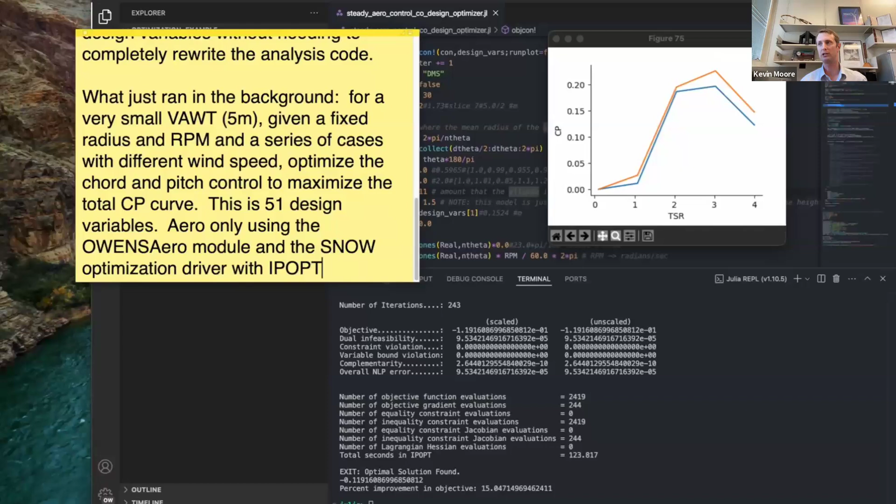So a freeform full pitch control at each one of the tip speed ratios to maximize the CP curve. And so 51 design variables, and it was enabled with these analytic gradients and using these open source modules in this environment.

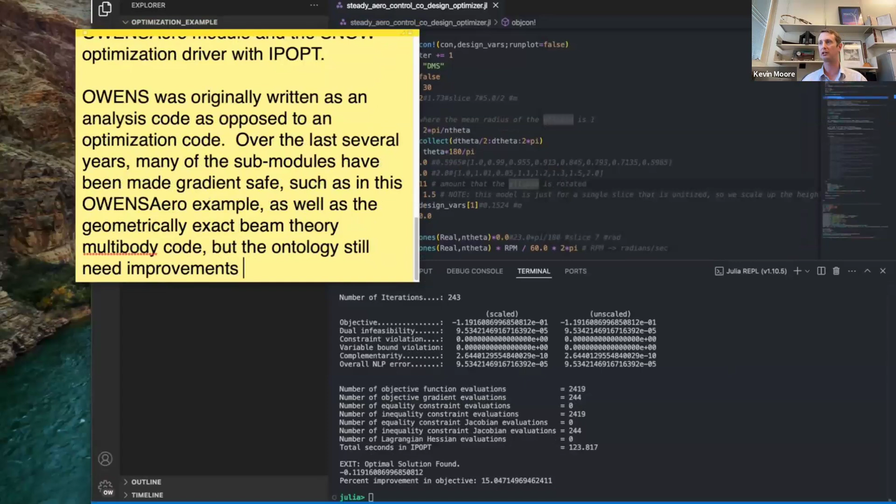And so OWENS itself was originally written as an analysis code as opposed to an optimization code, but we've made significant progress, especially on a lot of these sub-modules like the aerodynamics only. But overall, we're still working on bringing these advanced optimization capabilities to that.

So now we're going to switch over to the overall OWENS aeroelastic code that can be used for certification in the design load cases. And so in this demonstration, there's a couple of assumptions. First off, just to accelerate this video, the installation instructions were read, your system can already install and compile OpenFAST. You have the SSH key set up and your environment variables are already set up. The details matter, there's a lot of instructions, and the details are in the setup instructions.

So let's download and install Julia from JuliaLang. This installation is done on a Unix machine, on a Mac or on Linux, so we can take advantage of the terminal and the package managers. And so there we ran the Julia installation. The installation's a little bit accelerated in the video, but there Julia is installed, and now we're going to go and grab the OWENS installation commands.

We're going to go to the OWENS repository into the documentation and grab these installation commands that we're going to drop into the Julia REPL. And that sets up all of the custom dependencies for OWENS and precompiles. And so now within the main OWENS repository, there's the example cases and the test cases. We're going to clone that locally so that we can run those.

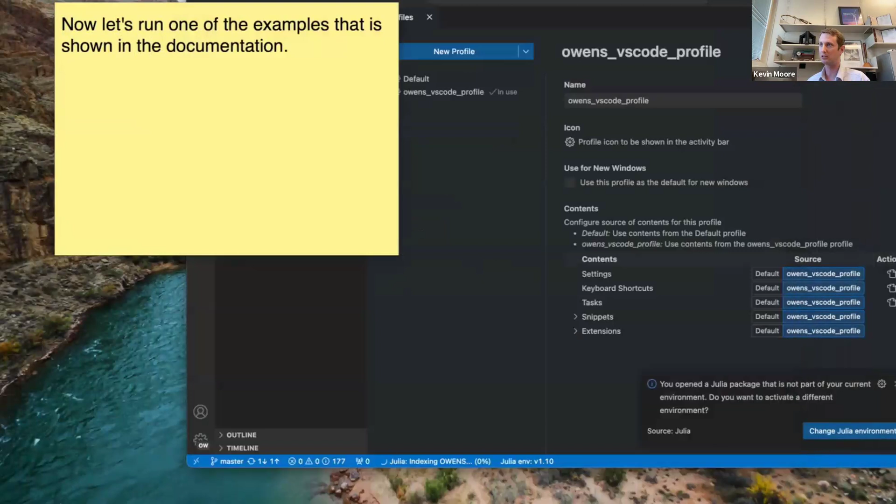So now we're going to run one of the examples that's shown in the documentation. This is the first simplest example, which includes a run DLC, the automated DLC run script that runs an end-to-end design load case. So we'll change the local path to match our system path as opposed to the documentation, and then we'll run that.

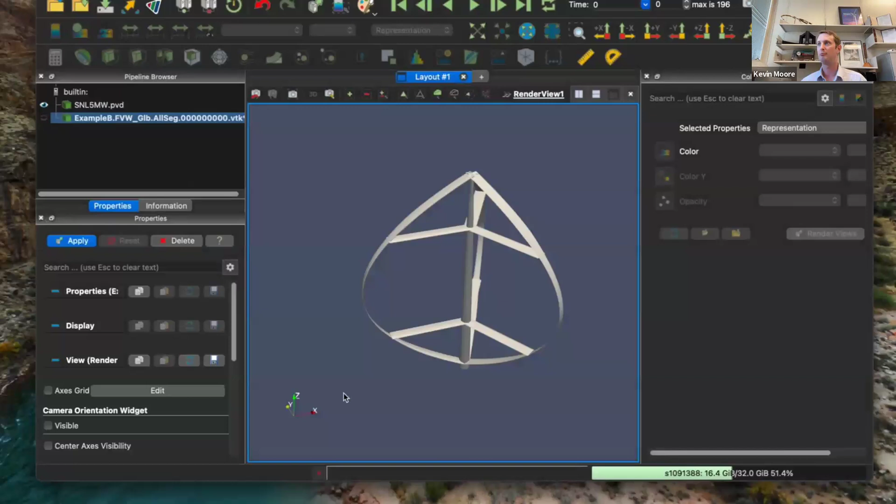That ran, that's great, but now let's install ParaView using the package manager, and then we'll open up ParaView and look at the ParaView output files. So this particular case ran with the AeroDyn OLAF aerodynamics, and so we load the OWENS structural side, and then we load the aerodynamics from OLAF. I didn't choose the right files, but I will on the next round.

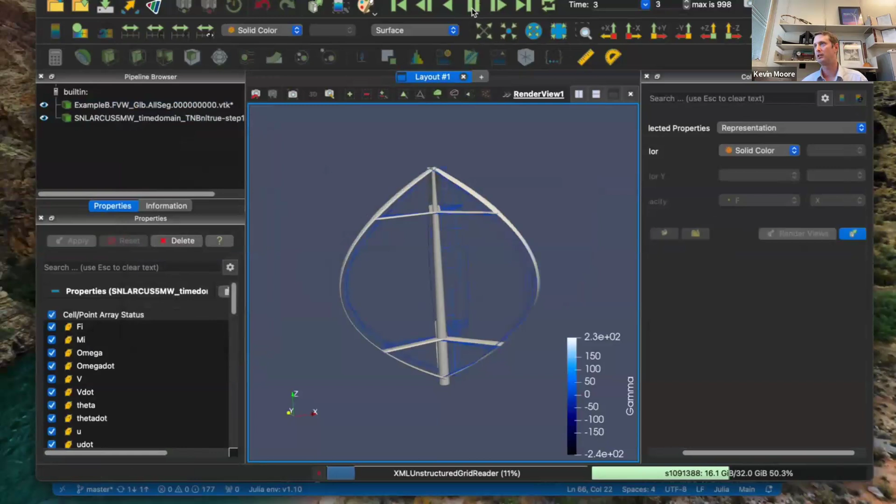So now we're going to run one of the other cases where we're going to change a couple of things and have it run for a little bit longer. And so this is example B. We change those, run it for a little bit longer. The design is low to the ground, which is why the vortices are down there. We reload the files, and I selected the right files in between.

And so now everything's all lined up. And so this architecture can be used either with a higher order aerodynamics, so you can get like the strut influence, or with a lower order aerodynamics that's faster, and you can do all of the design load cases and a wide variety of designs and configurations. Here's an example of a TORQUE paper that was published recently where we went through a coarse sweep of all of the design load cases for a VAWT.

All right, so one more thing, I'll show the Campbell diagram. So this is part of the test suite. So we're going to uncomment the plotting scripts so that they'll run, and then we're going to run it. And on the Campbell diagram generation, it runs the Timoshenko beam element theory as well as the geometrically exact beam theory, and then we compare it against the Sandia 34-meter legacy data.

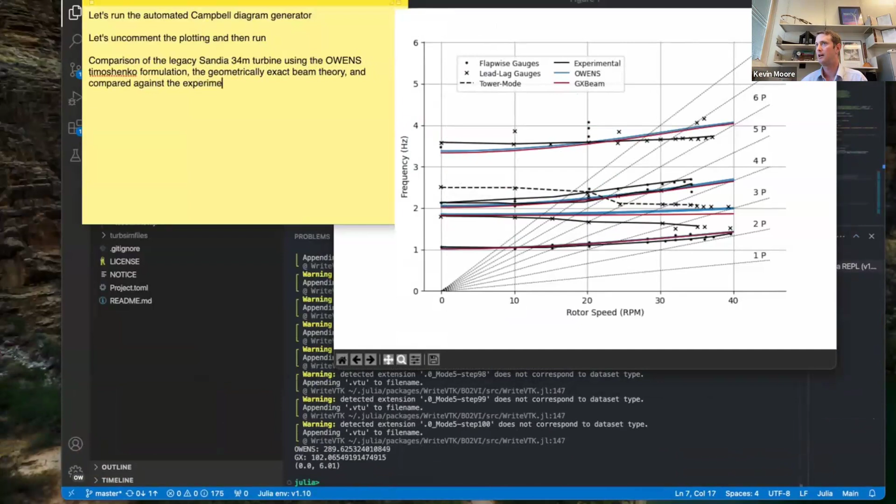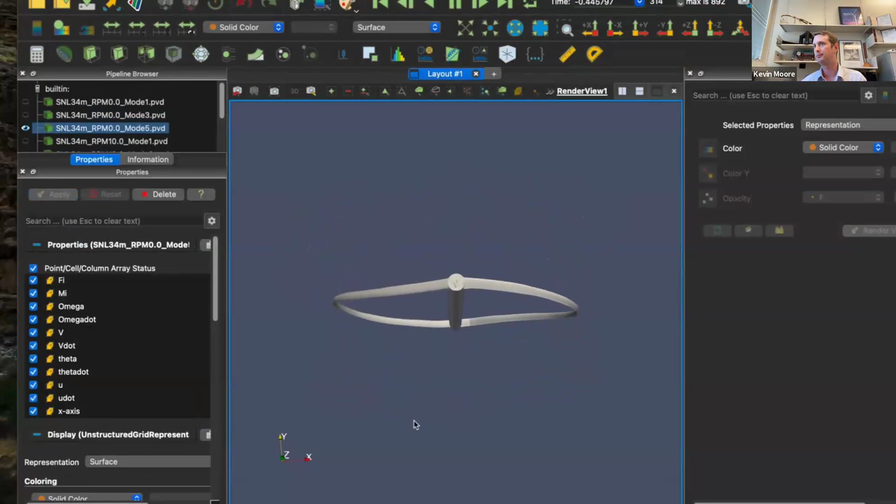Now let's open up ParaView and look at those modes. And so these are what happen to be saved. So we've got modes 1, 3, and 5 at different RPM levels. So this would be analogous to the structural only, as VAWTs are primarily driven by the centrifugal loading. And so there's mode 5, and then we can look at the different frequency. And so the ParaView is great.

There's still a lot of work to do, and there's also still more work to do on the documentation, but we've got these example scripts. We've got the API reference with all of the inputs and outputs for the functions. Not perfect, but there's a lot there.

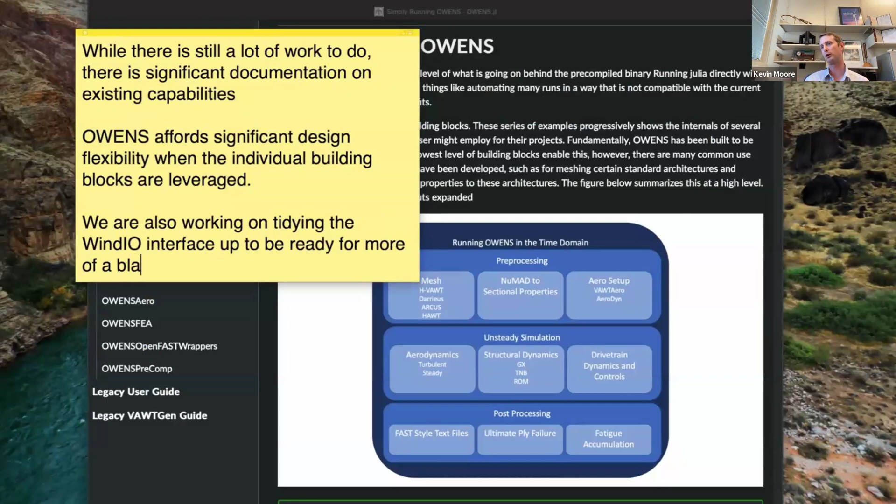Also, OWENS has a spectrum of what it can model, and so when you use those fundamental building blocks, they're very powerful, and you can model a very wide variety, such as the Windward Engineering Blade Runner concept, where we want to do the spokes, and we can run the full aeroelastic simulations with that. And then on the other side of the spectrum, where you want to just run with a black box and run more classical or canonical cases, we're doing significant improvements on that this year.

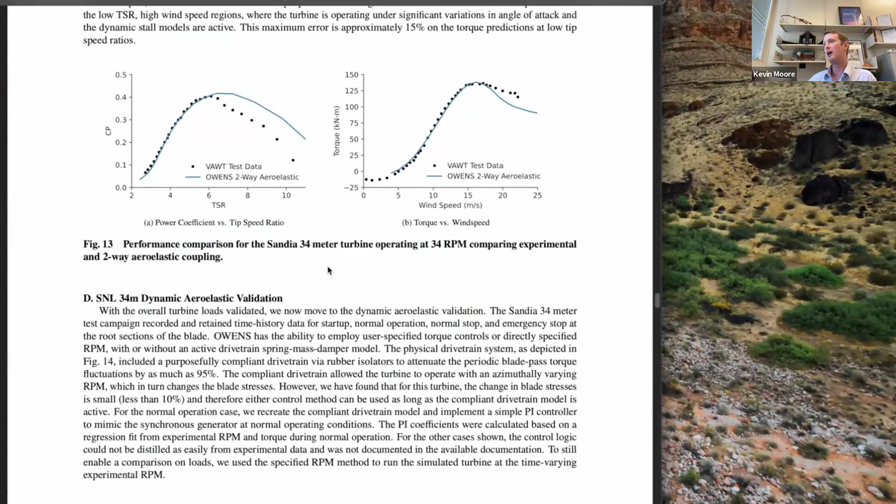And then this year we're doing a lot of validation. We do have confidence in the design, as we've done validation against this 34-meter turbine. It's 500 kilowatts, but it's aluminum, and it was from the 80s and 90s. And so we have confidence in the implementation, but we're really excited to be able to validate the existing composite input and all those sectional properties, and propagating that all the way through for FY25. So really excited. A lot more to come on user improvements as well.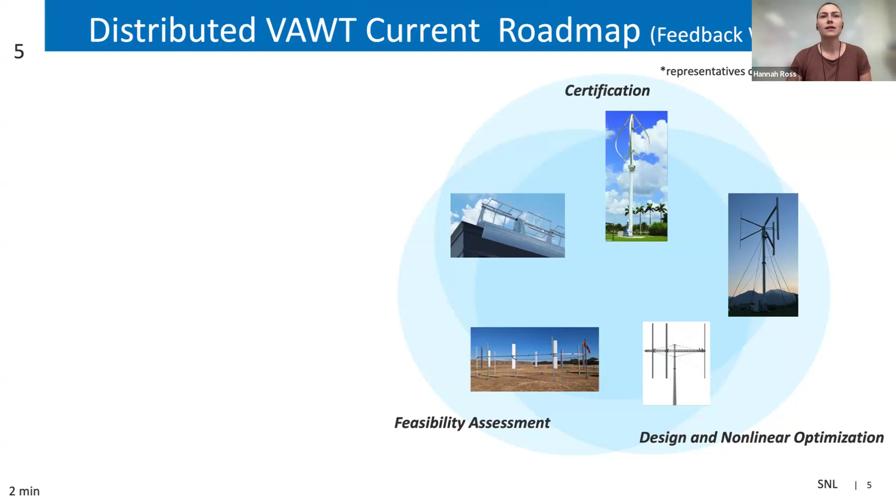And we want this additional flexibility to be able to achieve these for various different types of VAWT archetypes. As you all well know, the VAWT industry hasn't converged on something that looks similar across the spectrum. There's lots of different designs and geometries out there. These are just representative of some of them, but these are all geometries that can be modeled by OWENS. And so we want to continue to refine the model for these various archetypes and make sure that we can get accurate results that are needed for all of these tasks.

So what we have planned for the next steps of this work is, again, validation of these different common archetypes. And that includes some internal accuracy improvements, so digging down into some of those submodels and getting as accurate as we can with specific component and submodel validation. We also want to continue to do industry engagement.

Can you hear me still? Yes. Yeah.

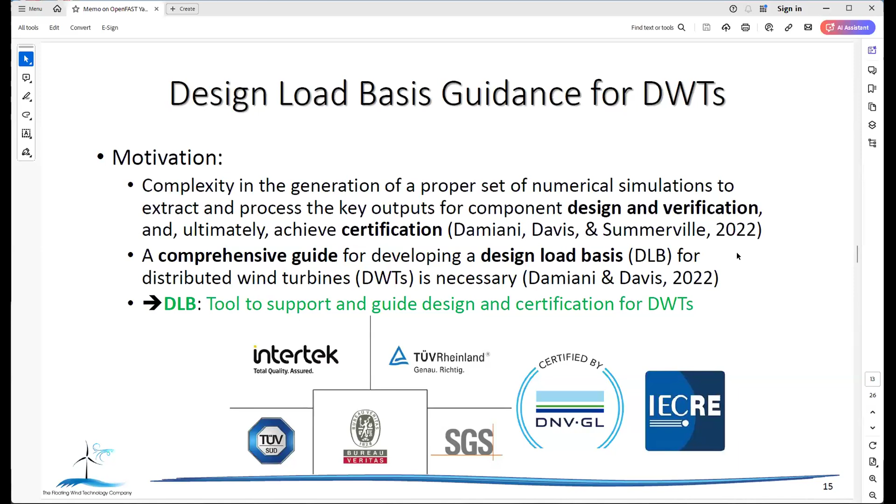So what are the main contributions of this technical report that we're about to publish? I would say first and foremost, we really formally describe the scope and the role of the DLB. So again, the design load basis within the context of the larger design basis and within the context of the certification pathway. We've also produced a typical table of contents that can be used by a typical user or a typical stakeholder. And we've provided a very detailed description of the various sections as well.

This document also provides a list of relevant design standards, both for certification as well as for design guidelines. And we try to fill in the gaps that exist in the main design standards for distributed wind, in particular, those in 61400-2. We've also provided a real-life example of a DLB, including what we call the LCT, or load case table, which is an instrument that you can use with the CB or your certification body to vet your design strategy and your aeroelastic modeling philosophy, if you wish. And we'll talk a little bit more about the LCT later in this presentation.

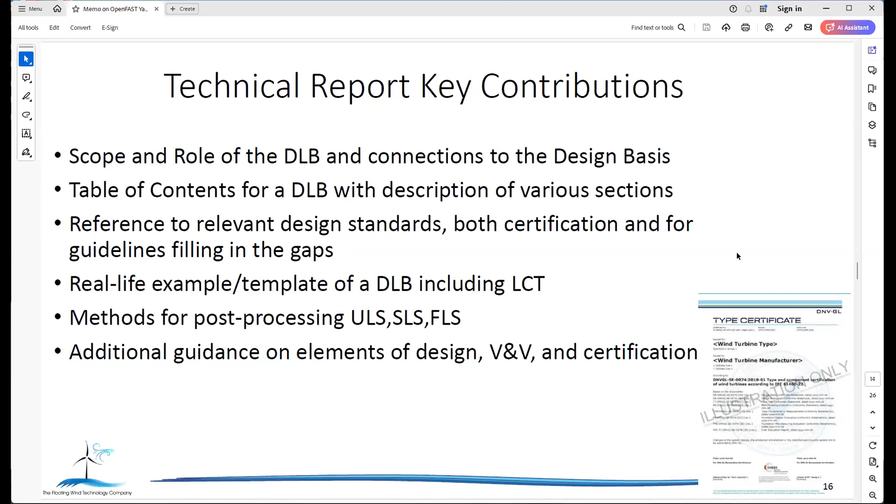Also, we propose some methods for post-processing of the limit states, the ultimate, serviceability and fatigue limit states. And I think that actually is one of our major contributions right there that could potentially make it into a new revision of the standards later on. We've also touched upon additional guidance on other items of design, certification, and verification and validation.

I don't see you guys anymore here, but I hope you guys are still online. Yeah, we're good, Rick. Thank you.

Okay. So where does the DLB fit within this path to certification? Well, as you can see here, we start from the design basis towards the design evaluation, all the way to a design certificate, a type certificate potentially, so a conformity statement released by the CVA. Well, the design load basis feeds into both the design basis and the design report. So both in the design basis evaluation as well as the evaluation of the design per se.

So it's a very fundamental piece, if you wish, of the design basis, and we try to formalize it. And by formalizing it, we actually make it simpler. A lot of the guidance may come, again, from the operational documents 501 and 554 of IECRE. And again, the users are encouraged to peruse those documents as well.

Here's perhaps the main content of the DLB. The DLB really provides specifics related to load calculation and component verification. It provides the methods and not the results of the load calculation. The results obviously go into a design report, but it provides the constraints within which you can drive your design.

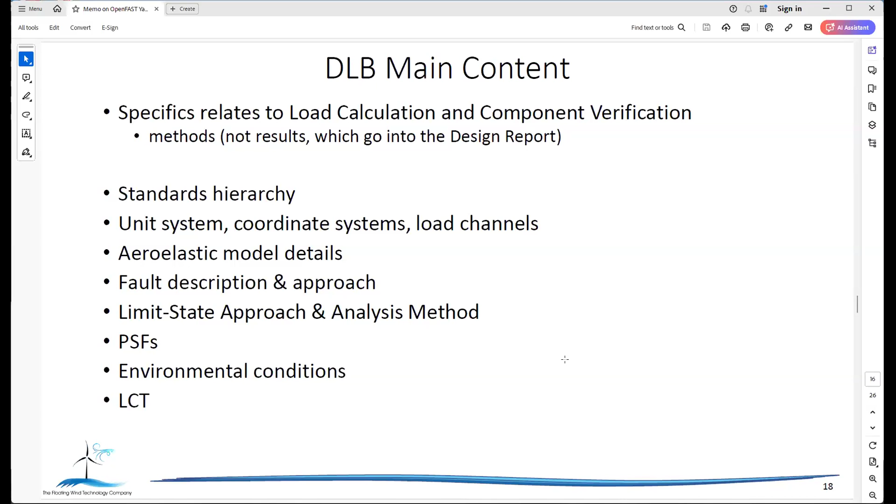One other aspect really important of the DLB is the technical description of the turbine, including the potential faults or failure modes, and the relationship between those and the DLCs that you would be simulating. Of course, it also includes the analysis method for post-processing, including partial safety factors, environmental conditions, obviously, and the fundamental LCT, which is this load case table.

Here's an excerpt of this report that shows the table of contents for a typical design load basis. So as you can see here, the various sections span from the description of the project to the numerical model description, all the way to the reporting requirements. So, it's good practice to put in writing what you would be delivering in your final design report, and sharing this document, the DLB, in advance with the CVA goes a long way, as it allows them to vet your DLB, to vet your LCT and your procedure, and also, say, the outline of the report that you will be providing.

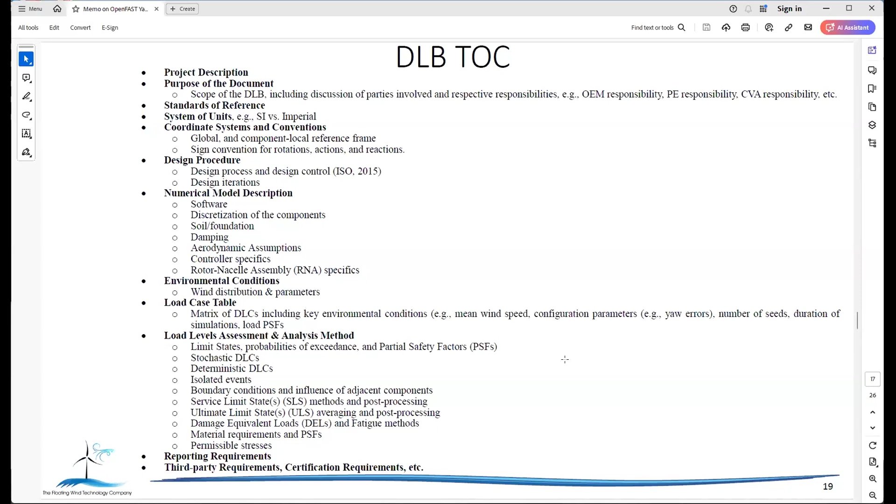So again, this requires a little bit of effort up front, but it allows you a smoother transition, a smoother interaction in your request for certification. We provided a very detailed description of the various DLCs, and we filled in a lot of the gaps that exist currently in -2, primarily with information coming from -1 that is much more complete and thorough.

For example, we specify for the various DLCs how many runs, how many seeds, how long the simulations should be, and what kind of parameters, for example yaw offsets, besides the environmental conditions to use. We also specify very clearly what kind of partial safety factor you would be using and how you would go about doing, say, the averaging of the various results.

And here is the load case table, or LCT, which is the fundamental piece of the DLB that again can be used to interact with the certification body. It contains a list of the cases specifically for your turbine model, for your configuration. That means that some cases may be omitted for some reasons, and so you can demonstrate, obviously, with some narrative why those cases are omitted, or why certain parameters within certain DLCs have been chosen.

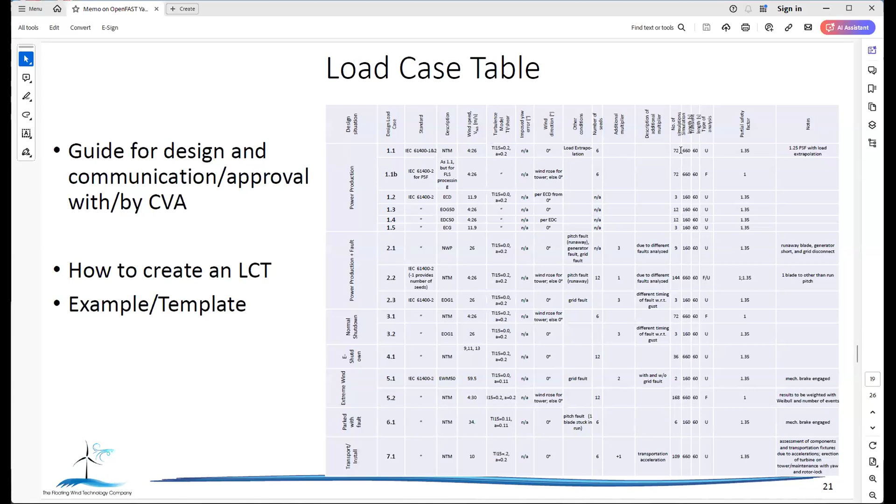We also provided a lot of guidance in the post-processing that can supplement, again, what's already in the standards, but with some more practical examples, perhaps, on how to really put together the results. For example, for the ULS and SLS, we talk about the Campbell diagram. I don't have to spend time on that, thanks to Derek in his presentation earlier.

But we discuss how to create a simultaneous load table. So what goes into the averaging of all the results to, in the end, extract an extreme case load table with simultaneous loads, and also how we go about handling PSFs within the context of the load resistance factor design approach.

For fatigue, probably this is really new. I haven't seen this formalized like this before. So I think this is a really great contribution to the community here. This guide to FLS processing, we discuss how we go from load cycles towards not only DELs and Markov matrices, but really how we make the connection to both the DLCs and the lifetime that we expect for that particular turbine.

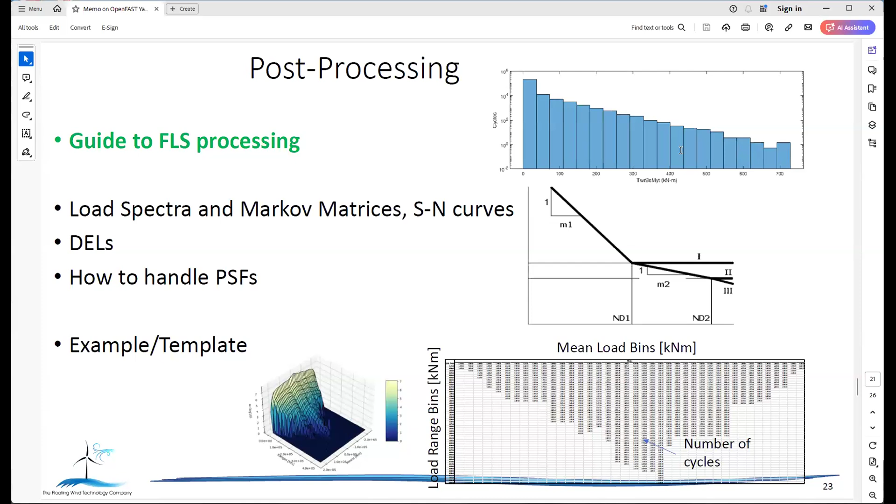And this is very clearly explained in this document. And again, you don't necessarily have to follow this approach, but we think it's a fairly standard approach also with larger manufacturers, and it can be used in the DWT world.

We've also expanded this treatment to the tower fatigue, which accounts also for wind directions. This is not necessary for the ACP certification, but it's probably good to have for specific installations. So for some of the stakeholders that are involved in the site suitability assessment, so the actual retailer, for lack of a better word, and installers and the developers, this is a tool that can help assessing whether or not a tower is suitable for a certain site.

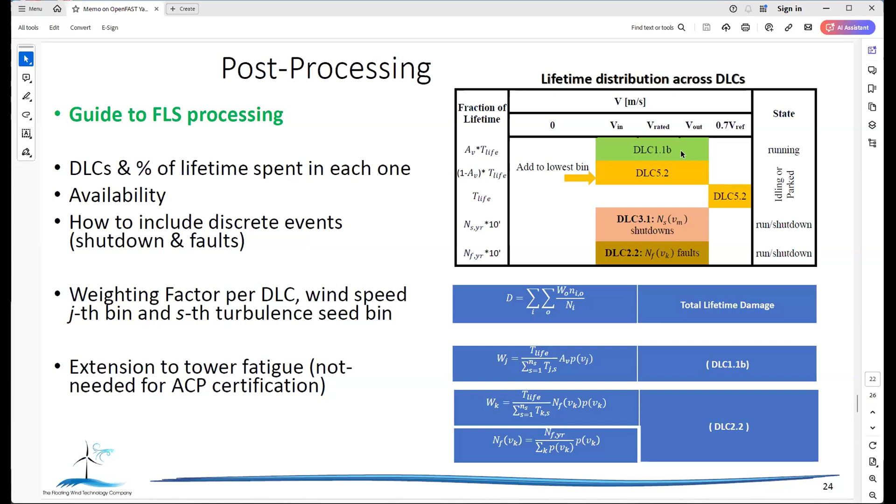We also touched upon the FMEA, which is another tool that is available to the engineers in general. This is the design failure mode and effects analysis matrix or table that allows you to understand what the failure modes might be and what the severity or probability of those failures could be. And then you can come up actually with a risk number. It's usually called RPN or risk priority number.

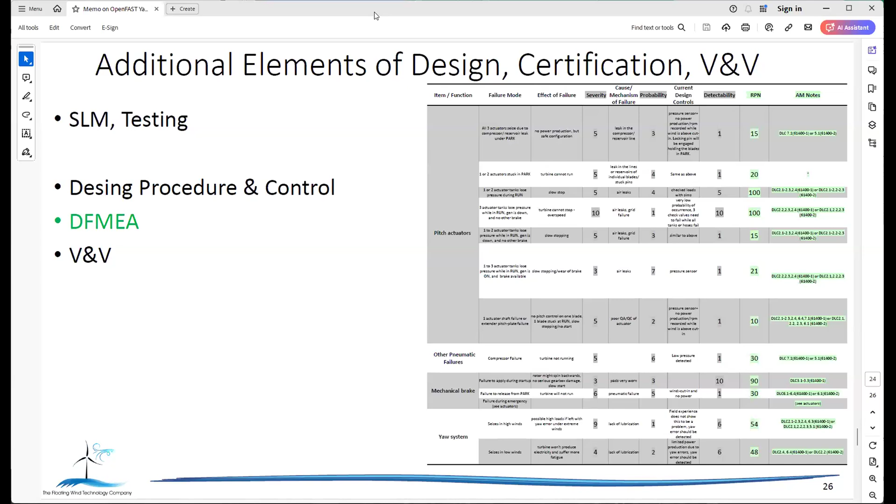You may be bored enough already.

So concluding, yes, we have identified the scope and the contents of the DLB in a very formal way, if you wish. We have provided detailed explanation of the various sections that go into the DLB, together with very thorough descriptions and a setup guidance for the aeroelastic model typical simulation.

We also provided in parallel, I haven't mentioned this too much, this very real life template, an example of a 50 to 60 kilowatt machine that has been recently designed by myself and Dean. And we provided basically the typical sections that formed our DLB. We also provide a step-by-step guidance in the post-processing, as I mentioned, and the verification for the various limit states.

So this is just suggested future work where we would put all these things that we discussed today into a package. So starting from the reference turbines that NREL and we've been working on, together with a design basis, a complete design basis, perhaps with a DLB. And then we could actually produce a full loads and performance report. So kind of a typical design report, at least for the loads.

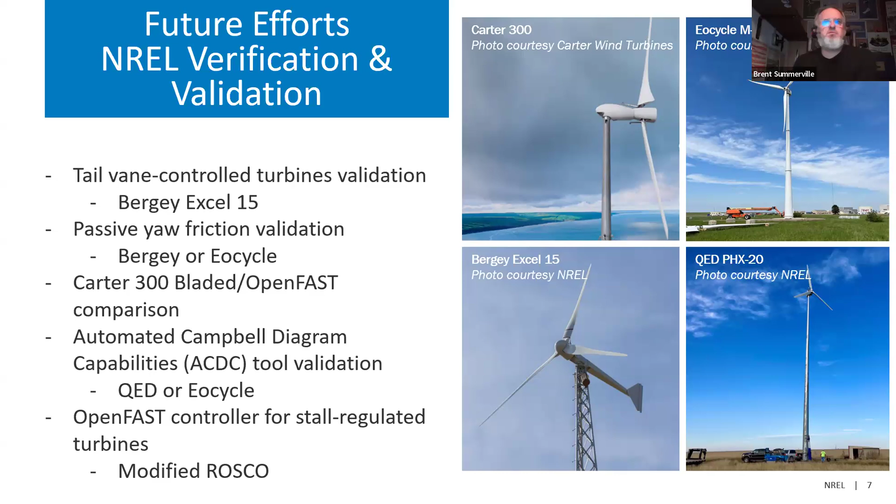In general, we knew this, but we got some good peer review feedback in our recent peer review of this project for the Department of Energy that it's really important to help the distributed wind industry understand how to access, set up, and utilize all these new tools and capabilities. So we want to focus on that this year as well. Recording, publishing instructional texts and videos targeted toward modeling efforts of these tail vane, yaw friction, passive yaw archetypes, generating Campbell diagrams and modeling VAWTs.

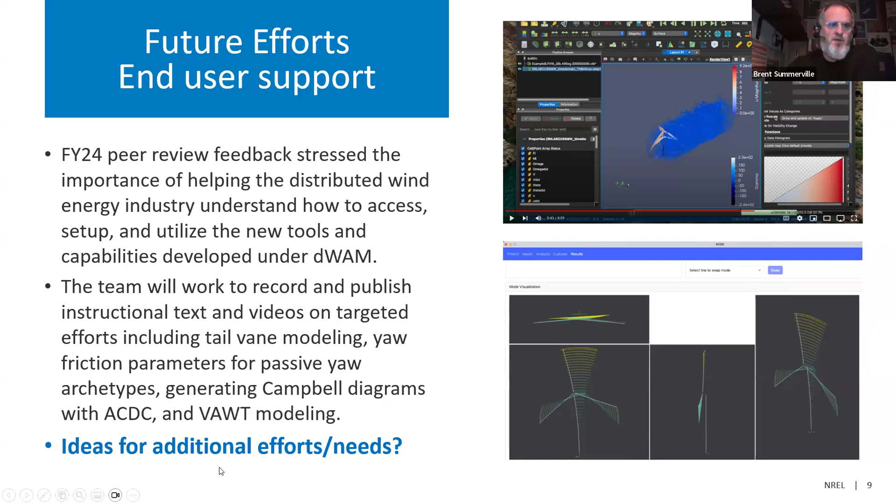So if folks have specific needs, specific questions, we're available and we want to be helpful. We want to put out any helpful documentation or assistance that will help you implement these new tools. And we'll open it now to both ideas for any additional efforts or needs in this space and any questions you have here before we wrap it up today. So thanks again for attending.